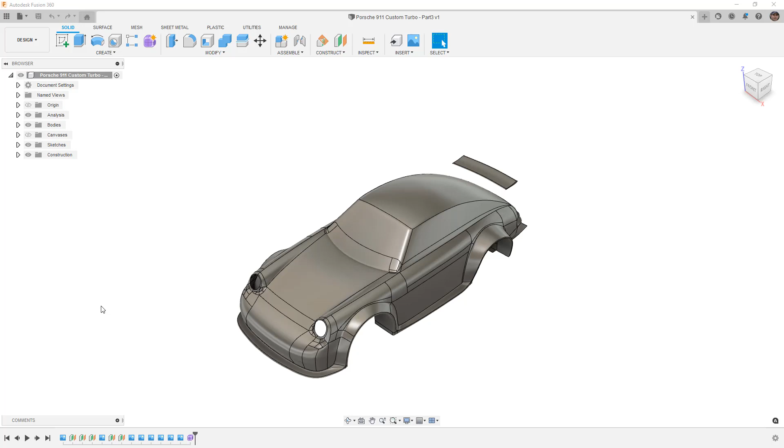Another thing in the description of the video is some rotiform rims that I modeled in a previous series. So in that series, we modeled these rims for a different size. So they've been modified so that they're now 20-inch, and there's a wider version for the rear. So you can go into the description of the video and you can use these rims if you wish, or you can bring in your own.

So the first step in this process is to go ahead and bring in the rims. And the reason I want to do it in this order is because that way, if we have to make any more tweaks to the body, adjust the wheel openings or anything like that, we can do it before we start adding those extra details. So the way that I'm going to do this, if you have them uploaded to your data panel, is simply just drag and drop them into your model.

When we do this, we need to position it. And this is the rear rim, so I'm going to pull it up about where I want it. I'm going to go ahead and zoom in. And you want to get it roughly centered in the wheel arch. And then I'm going to rotate around to a back view and simply pull it out where I want the wheel to be positioned. Now, in this case, I want the wheel to be just inside of the fender, so it has that look. That looks pretty good. I'm going to say OK.

I'm going to repeat the process with the front. Now, again, the front is a bit narrower. These rims are rather large. They are 20-inch, but they're also pretty wide. Now, the way that I want to do this is I'm going to bring this to the rear because I want these to be at the same height. I could have used some manual numbers to position these, but I want to make sure that they are at least visually at the same height. It's going to be important when we start to render.

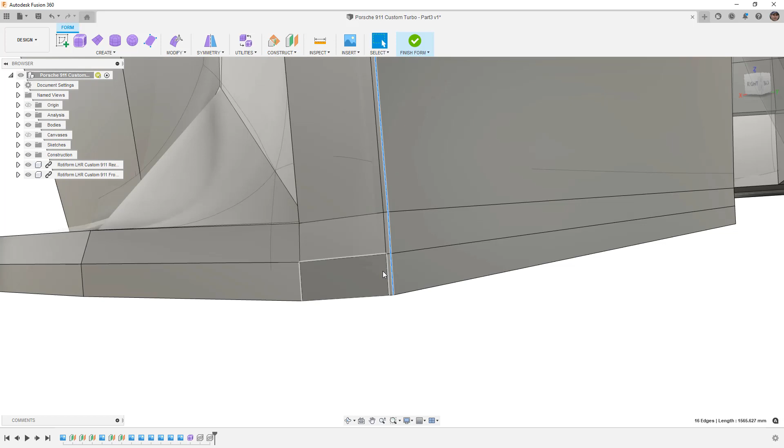And then we're going to hold down Shift, remembering that we have a T-point here. We're going to hold down Shift and double click. It'll grab that. We're going to repeat the process here. We're going to hold down Shift and select that, rotate around, hold down Shift and double click here. We should see the entire loop. We're going to do the same thing at the back because we do need to scale that down as well. We do have symmetry, so it is going to work on both sides at the same time.

And then we also need to bring in these other loops that are controlling the shape. And this is going to get a bit tricky because the loop, the double click isn't going to work. So we're going to have to manually select the first two, the third one, and then we're going to come over here, shift double click. I am holding down shift the entire time. You notice that we're missing a little piece here. We might need to go in and reconnect that. We can do that in a minute. And we also want to scale down this as well. So I'm going to shift click that still, and shift and double click here.

So the thing that we want to do is we want to scale all of this down. What I want to do is I'm going to go to modify and edit form. I'm going to reset my pivot and I want to stick it at the center of the wheel, but then I want to pull it down. Now the reason I want to pull it down is I want to get it roughly centered between the wheel arch and about at the bottom. It doesn't have to be perfect, but this is going to help us. We're going to say okay to the pivot location, and then we're going to begin scaling this down vertically. We want to get it to be roughly where the rim is.

We can switch between smooth and box display, but notice that that resets our pivot point. So if we switch, we need to reset the pivot point again. And now that we've scaled that down, we want to scale it smaller in this case, Y direction. So we're tightening it up on that wheel. So you can see that the wheel is kind of overlapping it. It's okay for what we're going to be doing in our renders. In reality, the fender well is not going to just go straight back. It's going to go up and then over. But for our purposes, it's going to be fine. So that's going to help us out.

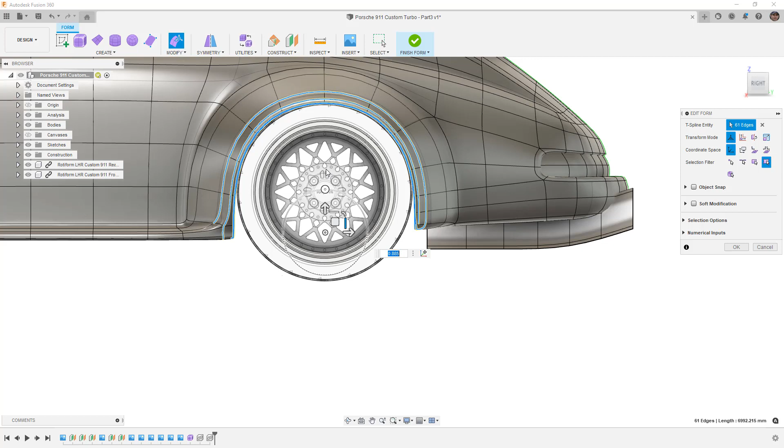We want it to be really tight in there, and that's the look we're going for to make sure our wheel is filling everything out. Once we have that, we can select Finish Form, and if we made all our selections, everything should work just fine. Now you can see the fenders are much tighter to the wheels.

That looks a bit better. Now, if you want to make any more adjustments, make sure you do it back here. If the wheels are in the way, we can get around that by hiding them in the design and then editing the form body. You might also want to hide the form body itself, so the main body here.

Once we edit form, it will show us the form body without that transparency. So if we go into bodies and hide, let's say, the tail lights and the wing and the Aero, you can see those are still there and transparent. But because we hid the body and the wheels, they're not visible there.

As we look here, there's a little edge we want to connect. So we're going to go to Insert Point, and I'm going to carry this over, hit Enter, just to help control that edge a little bit. You can kind of see that the resolution or shading happening on this edge isn't perfect.

Part of that is just the nature of how the model is being shaded. If you want to control that a bit better, you can add additional edges. It gets a little tricky, but you can go to Insert Edge and stick one relatively close, and then tighten that edge up a bit more.

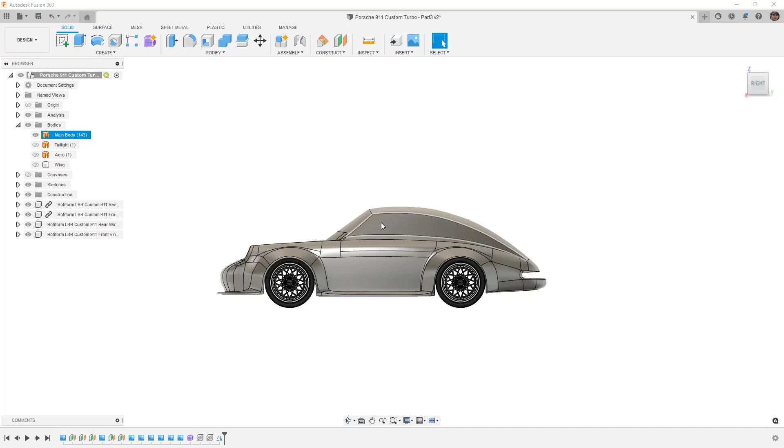The first way we want to do this is by simply creating a sketch wherever the windows are. So when we look at this, you can see there's a slight difference from the blueprint. The edge created on this surface is a little bit lower than the edge on the blueprint.

Now this is actually a drip rail on the car, and the window is just below that. So this is one of those cases where we're going to be a little more lenient with the shape, and we're not going to perfectly match the blueprint, because the shape of our car ended up having this edge that carries here and this edge that carries here. If we try to make the shape of the window different, it's not going to look right.

So the way I'm going to go about this is I'm going to create a sketch. It's going to be done on my right plane, which is the YZ plane. And I'm going to begin by using this midline of the body—this is already here, based on the shape we created.

So I'm going to use Create, Project Include, and Project, which is also P on the keyboard, to bring that directly into my sketch. This is going to be a part that we use, and I'm just going to make sure that I stay underneath this edge on the car. This front piece here is basically a straight line, and I'm going to use that to my advantage.

So I'm going to select that projected edge, and I'm just going to simply draw a line until about where the transition starts. I'm going to select the green check mark to OK that, and then I'm going to move on to creating a spline.

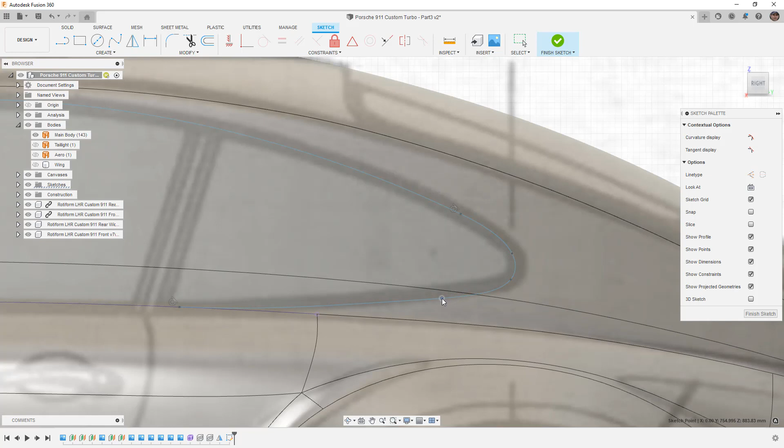But again, what we're going to do is get reasonably close to matching what the Porsche is, but it's not going to be critical that it's exact. I want it to be visually similar, but again, I'm not going to kill myself trying to get it exact because it will never be perfect, and I can tell you that.

The last thing that I want to do is take this projected edge. I'm going to find where the constraint is that is visible here, and I'm going to hit delete. Select it and hit delete. It's going to convert it to a polyline. You can see that it's got a bunch of vertices here.

And then we're going to use trim. And the reason I want to use trim is because I want to get rid of the section that is outside of it. It's going to tell us that some constraints are going to be deleted. That's fine, but I just want to get rid of those. So now what I have is this complete closed profile.

If we hide the main body, what we should see is a closed profile that we can select. We're going to be using this for a surface, so it doesn't necessarily have to be completely closed, but because we're going to be extruding a surface, if it's not closed, it will only cause trouble downstream. So if you cannot select this profile, spend a little more time making sure yours is right. Now that the body is hidden, I'm going to take this opportunity to make some slight adjustments.

And then I want to make sure that I don't have any extra geometry down here. So you can see that we've got a little bit extra here. I'm going to use trim, and notice that it's not actually allowing me to trim anything.

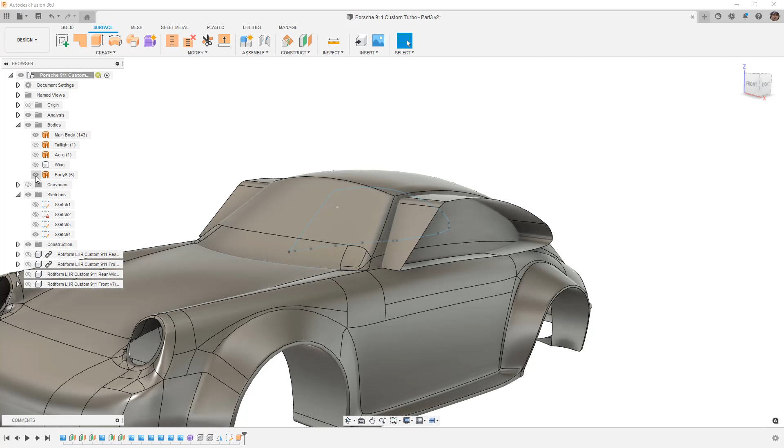So Control Z to undo, and let's bring this back. So the reason that we used this as opposed to just the sketch is because we're going to offset those windows inward. So we're going to go to Modify, Split Body. The body to split is going to be our main body. The splitting tool is our extruded surface.

You notice that we can extend the splitting tool if it didn't go all the way through the body, but in this case, we extruded it all the way out. We're going to say OK.

So now we've got the main body, which we can hide temporarily. We've got our extrude, and then we've got these window surfaces. So the reason that this is important is because now we can use these window surfaces to trim our extrude.

And then instead of offsetting them because it'll be normal to the curvature, we're simply going to move them inward. Because the windows never line up perfectly with the outside of the body, we need to move them inward to give the appearance that we've got that extra thickness that the glass is set into the door. And then we can add additional trim if we want to.

So what we're going to do from here is we're going to simply say trim. The trim tool is going to be this surface, and then we're simply going to get rid of everything on the outside of it. Using my right-click marking menu in the 12 o'clock position, I'm going to repeat trim. This is my trim tool, and I'm going to remove everything outside of it.

Now that we have those pieces of glass, what we want to do is use Move Copy. Now you can use M on the keyboard, or you can go down to Move Copy. We're going to move bodies. We're going to select the window body that we want to move. The coordinate system should be in line with the default origin, so you can see that X is in line with this direction.

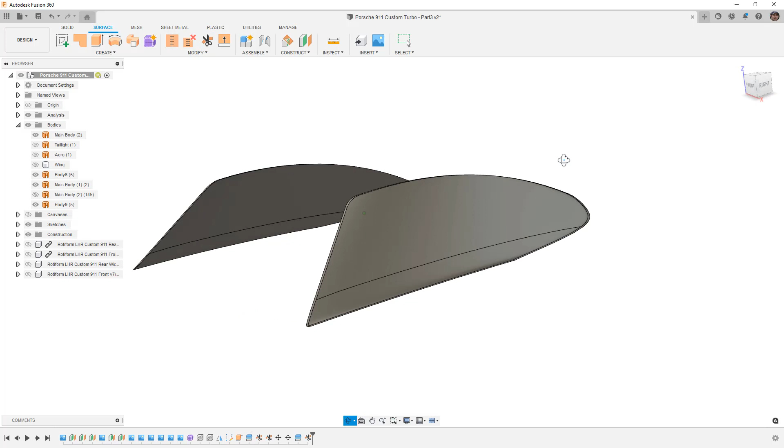So we can repeat the process using split body, or this time we could use trim. And that's simply because we can now trim it because we already broke off the other section. It gets a little tricky based on the selection because sometimes it doesn't seem to work, but you might just have to move around and select a different area. So that looks pretty good. This section down here doesn't look like it has tangency, but it's probably going to be good enough for what we need.

And the last thing that I want to do is I want to stitch these together. So I'm going to stitch the window glass and that little trim piece, and I'm going to repeat the process on the other side, the window glass and that little trim piece, and say OK.

Now, you might be thinking, why didn't we just stitch them to the main body? Well, the reason we didn't do that is because maybe you want to split it up later and leave the rear glass in place, or maybe you decide that you want to do some renders with the windows down. It can be helpful to have these be separate bodies, so that way we can just decide later if we want to put it all together. So I'm going to call this left-hand LH glass, and I'm going to call this right-hand glass, so that way I remember what they are.

So now if we look at this, if I hide edges, you can see that it looks like the glass is inset that 10 millimeters. It has a little bit of a step right here. Again, we could go back to the original sketch and we could make sure that that tangency is held true, and everything should update if we do that. So Control and 6 to bring my edges back, go back to sketch 4. I'm going to go ahead and edit sketch 4.

And you can see here that the tangency looks like it might have been lost. So what we can do is we can try to get that tangency back. We can finish the sketch. And theoretically, everything should still work fine. It should have updated that as long as our sketch and our extruded surface didn't cross over another face. So for example, as long as it didn't go down into this part of the door, the updates should all be fine. So that's the general process that I like to use to create the glass, and that's true for the rear glass and the windscreen.

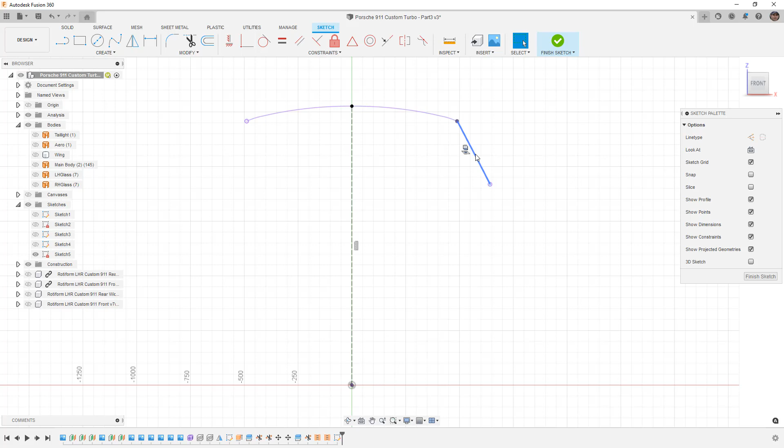So now is the time that we want to offset those inward. It might be helpful to see the canvas so we can kind of decide how far in we want to go. But again, we're doing this visually, so it's really going to be up to you. So I'm going to select offset. I'm going to grab this and simply pull it down. And it looks like about 25 millimeters is going to give me about the right shape.

For the bottom section of the windscreen, I'm going to use my line tool. I'm going to pick about where that is, and I'm going to draw a horizontal line out to the left. I want to convert that to construction, and I'm going to use that to help define tangency. And it's important that we have this reference here. You can see it's perpendicular to our vertical line. And that means when we mirror something across to the other side, it's going to be perfectly smooth at that mirror line. So that's going to be very important.

We're going to go to Create, 3-point arc. I'm going to start here. I'm going to come over to about where the curvature would change and make sure that we have tangency there. Hit Escape to get off the arc tool. This is essentially a straight line. So what I'm going to do is use my line tool, and I want to carry this down. And we're going to maintain tangency.

And then I want to bring this arc over, and I want to connect these 2 points. So again, what we're doing here is we're snapping these together. This arc has tangency at the center line where we're going to mirror. And now I want to create a fillet there. I want to round that corner. And we can decide how big or how small that needs to be. 15 millimeters looks like it's going to be okay. And then we'll hit Enter to OK the fillet.

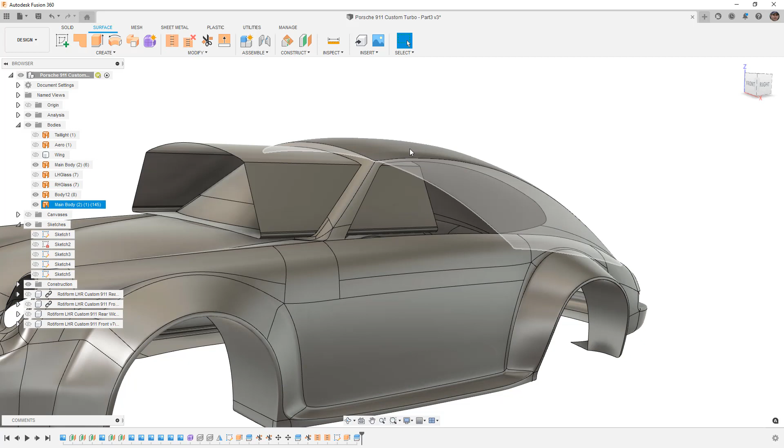So now we can use this again the same way as a split body tool. Bodies to split is the main body. Our splitting tool is this surface. We don't need to extend it out. If we do that, it's going to extend it all the way through the back, and we don't want that. So we're going to use just the extruded surface, and we're going to say OK. Now we can trim. Using the split body, we can get rid of this front section of the windscreen.

And then we can use Move Copy. Again, that's M on the keyboard. We can move the new body that was cut, the glass. So we need to find that. It's going to be this original main body. And we need to select a distance to move it back. So 50 is probably a bit too much. Let's try 25. And you want to look at this from the side. You want to see what appears to be realistic. Now, when we move it back 25, that seems to be a bit too much as well. I'm just going to go 10 millimeters, the same as we did for the side. And I'm going to say OK.

Now, theoretically, if we hide this, we should have an extrude. Might be kind of hard to see. This extrude that connects to our A-pillars. So now what we want to do is take that offset, and we want to trim this extrude. So let's hide the main body. And you can see here now we've got that small section. We can trim or split body. Either are going to be fine, but the trim tool is going to be this, and then we want to get rid of everything behind it. So once again, what we've done is we've created this little offset that's going to help us seal off the windscreen. You can see here everything's sealed off.

Now that we have surfaces, we can come back and we can add fillets in the corners if we want them. But what I'm going to do first is I'm going to stitch everything together. So this is a case where I'm never going to do a render without the glass. So I'm just going to connect it to the main body. And assuming we have green edges, then everything looks good. Those will all be connected. And now if we want to, we can come back with a modify fillet and we can round off these inner corners. We could have, of course, done this with the sketch itself. Sometimes it's easier to do it afterwards with the surface. And we can pull that in and just round it off a little bit. 10 millimeters will be fine.

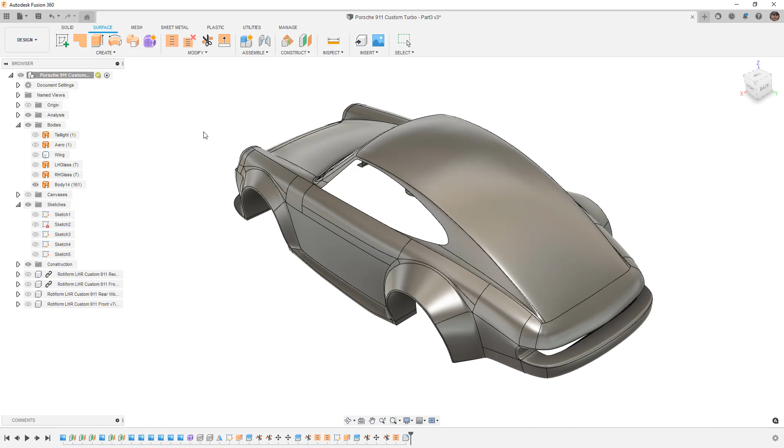For the back glass, I'm going to do this from the top. I'm going to bring back my canvases. You can see this blueprint actually has a sunroof on it. We're not going to do the sunroof. We're going to leave the complete top as is, but we want to create this back glass. So I'm going to create a sketch on my top plane. I'm going to rotate it around so that it's horizontal.

It's a bit easier for me to work with this way. And I want to begin by creating some lines. So I'm going to start with a line from the origin. It doesn't have to be from the origin. You could simply create a line out here that was coincident with the origin, but for me, sometimes it's easier just to draw all these lines as references. I'm going to make sure that they're construction. So again, X on the keyboard, or you can do it over here in the sketch palette.

Then I'm going to create, again, some reference lines that'll help give me that perpendicular, or in this case, vertical relationship. Those will be construction as well. So again, X on the keyboard. And then what I'm going to do is I'm going to create some arcs. Now, I know that this isn't just a straight line, so I'm going to create some arcs, and I want to make sure those arcs are tangent with this perpendicular line. And the reason that I need those to be tangent is I want to make sure that when I mirror these, that the mirror is smooth across the middle. So make sure that you do have those tangencies.

And then we're going to bring this all the way to the corner. We could offset this edge. It looks fairly straight. So what I'm going to do is I'm going to draw a straight line and just make sure that it looks parallel. Again, visual references or visual cues are going to be more important for us than to perfectly match the blueprint. So we're going to take that, we're going to add some fillets in the corners, make them whatever size appears to be right. 37.5 looks okay to me. So I'm going to hit enter to okay the fillet.

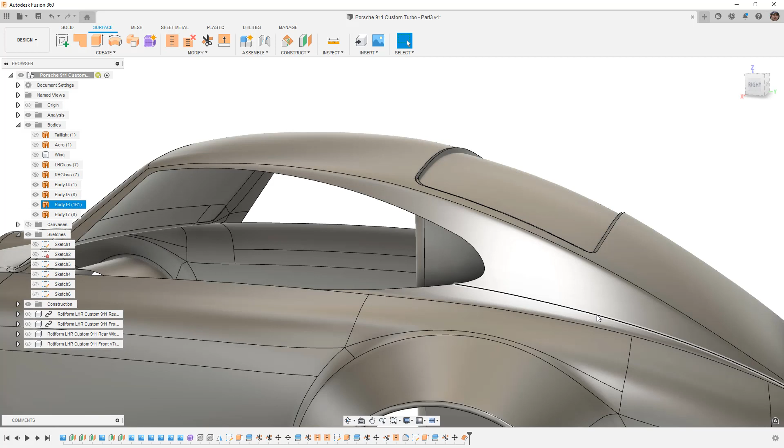Another thing that we could do, if you don't want to just have that hard vertical edge, we could get a little bit more creative. So for example, we could go to offset. We could select this body and we could offset it inward. Let's say -5 millimeters. Let's go a little bit more extreme so we can tell. Let's say -10 millimeters. With -10 millimeters, what I'm going to do is I'm going to hide the main body so we can see what we did. What we're going to do now is we're going to use this offset to trim away the moved glass, and then we're going to loft between the main body and this.

So we're going to go to trim. My trim tool is going to be that new offset, and what I want to get rid of is that little sliver, that little piece there. So now I've got this extrude that we don't need. I've got my main body. Let's go ahead and hide this extrude as well.

So now we've got a gap between our main body, but the reason that we did this is because when we look at it from the top, now the glass and the opening are perfect offsets of each other. And the reason that we could do something like this is now we could loft between them. Now, when we do a loft between them, I'm going to use chain selection, and I'm going to go from the entire upper chain to the entire bottom chain, and I'm going to go ahead and stitch those together.

So again, the reason why we would do something like this is if we didn't want the glass to be offset completely vertical, if we wanted to maintain a small angle there. We could always come back and do something like a fillet on this corner. We could do something very small, like 5 millimeters. It would probably work. It's not necessary. Again, it really just depends on the car and the geometry you're working with. But sometimes using things like a loft can help us get those transitions to look a little bit more realistic. Let's do a quick save.

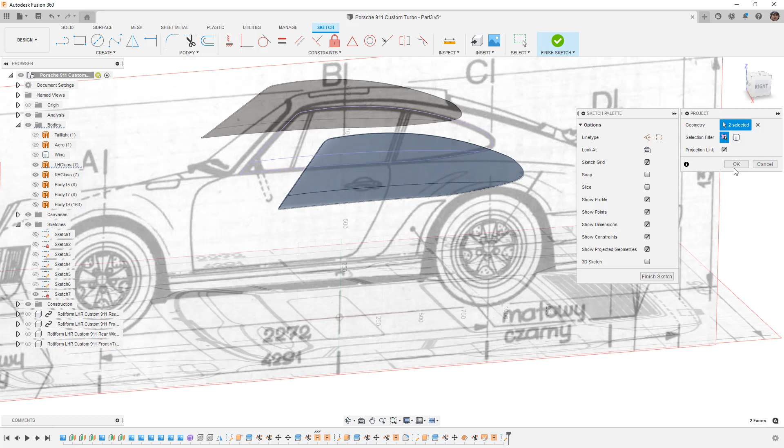So let's go ahead and use P on the keyboard to project, and we're going to bring in either this sketch, or we can simply select an entire face or a body that we want. So if we select these two bodies, you can see that it brings in some of the midlines, or you can select the sketch. It really doesn't matter. I'm going to go ahead and delete those middle pieces, just select them and delete them. But now I've got the upper and the lower sections.

So I'm just going to use my line tool, and I'm going to simply draw a line that looks like it is roughly in line. And then I'm going to make a parallel line. I'm going to do the same thing back here and draw another one. I'm going to make them parallel. And again, this is just going to add a little bit more realism. It's not necessarily required or needed, but it does help us with the realism a little bit.

All of them are parallel. If we want to, we can use D on the keyboard and dimension them so that they are the same. I'm just going to select this dimension to link them together. And again, we can do the same thing up here just to make sure that they all look consistent.

So now that we have these three pieces, what we need to do is, well, first off, let's get rid of the canvas. It makes it really hard to see. But we're going to extrude them as solids. They could be surfaces if you wanted them to. Honestly, it just depends on what you're doing.

If you want to make them surfaces, what you're going to end up doing is splitting this and then offsetting them forward and stitching them together. But it's probably just quicker and easier to do them as solids.

So I'm going to start with extrude, and I'm going to select all three of these. I'm going to start them from an object. So when I go from an object, I'm going to select the left-hand glass, but notice that nothing's happening because it wants an individual face to start at. So when we do this option, it's not going to give us the best result because we can't select the entire thing. So a way that we can get around this is by actually going to offset this.

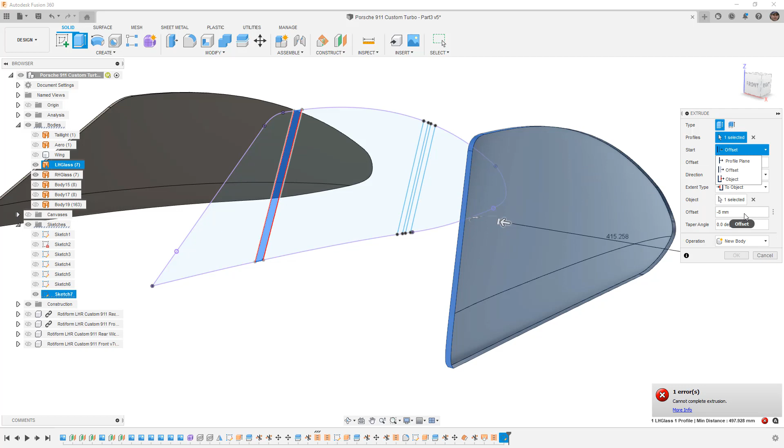So we're going to simplify this a little bit. We're going to do just a single edge. We're going to go from an offset, and we're going to go to an object. Now, if we do 0 millimeter offset and to an object, you can see that it's still not working.

So let's try this. Let's go from the profile plane. Let's go to an object, and let's go 10 millimeters. Now, when we add the 10 millimeters and we're going up to this object, it's not working for two reasons. Well, for one main reason. It's not working because of this right here. Because this is stitched to the rest of it, it just absolutely does not like it.

So the way that we have to get around that is by selecting an individual face, but then you can see that it's missing the stuff down here because it doesn't actually know what's supposed to happen there. So the easiest way for me to make this work is to create an offset. So I'm going to offset this 10 millimeters. So we're going to go -10.

And then you'll notice that it doesn't actually extend in the proper place at the bottom. And the reason it doesn't is because we didn't offset it before, we just moved it. So we can extend the entire thing out and just move it out an additional 5 or 10 millimeters. It really doesn't matter as long as it extends past where you need it to cut.

The other option that we could do is to create an offset like we did of this, but make it 0 millimeters. And the reason we make it 0 millimeters is now we can use modify, move copy, and we can move it forward the 10 millimeters that we need to go. So this gives us the complete outside section.

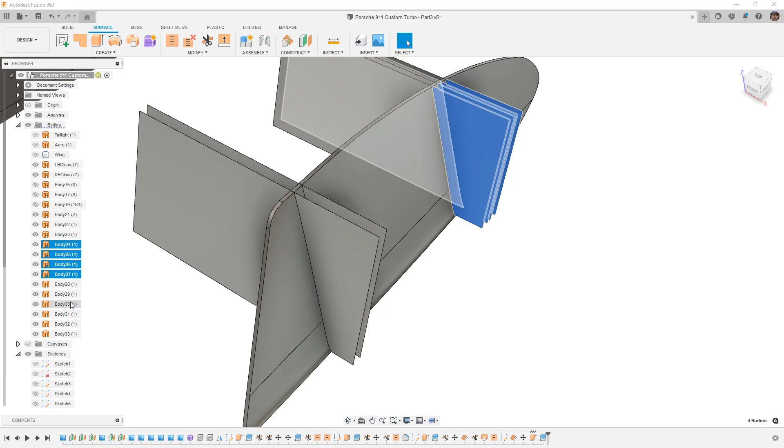This is going to give us all of these little pieces, these little surfaces that we don't need. So we're going to find where they are and select them. You might need to move the cursor down until you find which ones are the correct ones. It looks like these two here.

I'll also go back to these other extrudes that we don't need anymore. I'm going to right click and select remove. Remove is important and not delete. The reason remove is important is because it puts something in the timeline for us, where delete will try to get rid of everything associated with it, and that's not exactly what we want.

Now that we have the outside section of where these trims are, we can use them to break up the rest of this. This is where a tool like a mutual trim would come in really handy, but unfortunately Fusion doesn't have that, so we can't necessarily use trim in all cases.

So I'm going to start with trim. My trim tool is going to be this surface, and then I'm going to remove the outside section here. I'll repeat that: a trim tool is this back surface, and then I can get rid of this outside. Now that works on the outside pieces, but it doesn't work on the inside pieces, simply because we need to leave the rest of the surface for other things.

So we're going to have to use split body. We could also use split face and then delete them, but split body seems to work. Bodies to split and splitting tools - here I'm going to select multiples, all the ones that we need, and say OK. You can see it gives me an error - it was able to try to split this, but you can see that it didn't actually work.

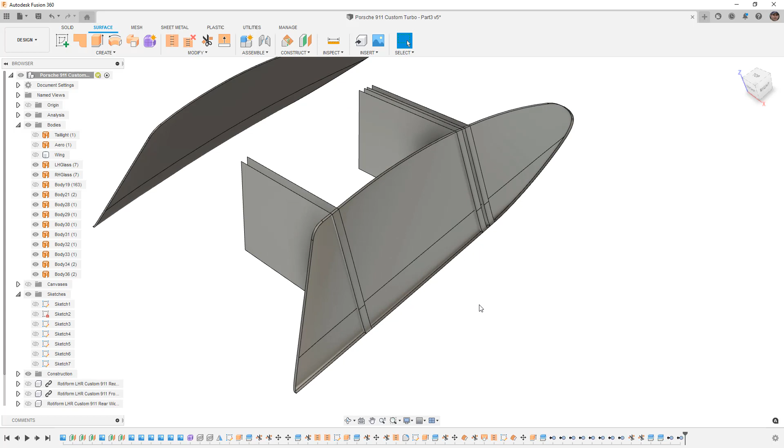The next thing we're going to do is go to trim. The trim tool is going to be this right here, and what we're going to remove is all of these back sections that we don't need. This one's pretty easy - we can select all these little pieces, say OK, and it should get rid of all the back pieces of the surfaces.

At this stage, we have to decide do we want this to be a part of our glass, or are we going to just make these their own bodies? Now if we're going to make them their own bodies, it's going to involve us splitting this back glass, making copies, and stitching them together. We can leave them as just surfaces and just apply appearances to them.

Any of those options will be fine. For me, what I'm going to do is I'm going to stitch the little pieces together. I'm going to rotate this around, stitch those together, and repeat the process and do the same thing over here.

If you ever need to select through something, you can hold down the left mouse button. So for example, over here, let's go ahead and hold down the left mouse button, and it can show you which little pieces are available for your selection.

So now that I have those pieces, because I need to repeat this on the other side, I'm going to leave them as is and mirror them. I'm going to make sure that I mirror them as bodies. It's going to be these three pieces, and the mirror plane will be right in the middle, and it'll simply put them on the other side.

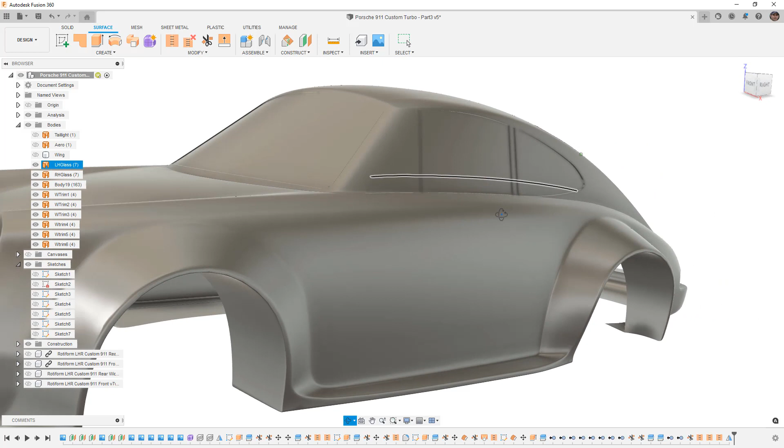At this point, things are looking pretty good. We're getting a lot of those little details, but hopefully it's not getting too much. Hopefully you're starting to realize that it does take a good bit of time, and sometimes the method you try to use is not going to work, like extruding the solids up to this window didn't work. Sometimes it does, sometimes it doesn't.

It's going to depend partially on whether or not your sketch completely sits inside that surface, if you're trying to use multiple profiles, and all these different little things that can cause those problems.

There are plenty of other bits we need to do to this. This is a good time for us to save and think about the next steps. For me, what I want to think about is do I want this body kit to be smooth and blended into the rest of the car, or do I want it to look like it was stuck on? And how do I want the rest of the body to look, the openings in the bumper, and all those extra pieces?

We also need to think about things like the headlight. We have a scoop that we need to make on the hood, and we need to have the opening for the engine bay, and we have a spoiler, and we've got the tail lights and the aero. We've got all these little bits that need to happen, so there are a lot of extra steps that we need to do for the rest of the car.

But the first thing I want to start to think about is the body kit. I'm not going to worry about the openings in the front end just yet. I need to think about where they actually split. So if we take a look at the original car and the blueprints, you can see that the bumper splits right here. The original body is just below the headlight, and it comes to about here.

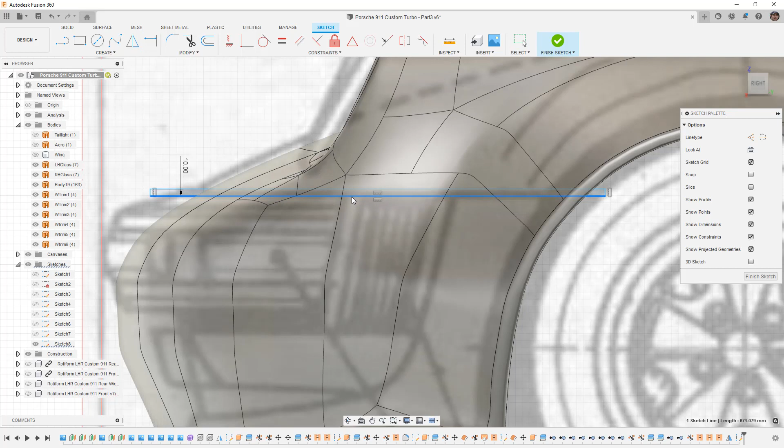So I'm going to go to a sketch. Again, we're going to just use these default planes, and this is actually going to be pretty straightforward. I'm just going to create a rectangle, and the rectangle is going to represent the height of the seam that we're going to create. So I want to figure out how wide this needs to be. While I don't need to dimension it, I'm going to, because I'm going to try to keep the gaps fairly consistent. I'm going to say 10 millimeters. 10 millimeters is going to be the default seam that I'm going to use. So I want to find about where that needs to be. That looks okay, and we're going to finish the sketch.

Now this gets a little tricky. The reason is because when we split this up, it's not going to work like the headlight. It's not going to work like the windscreen or the side glass or the rear glass, because we can't just use this extrusion to fix the rest of it, right? Because if we create an offset, it's going to be normal to the curvature, so that's not going to work.

Also, we need to think about things like this tiny little face right here that's going to be right underneath where that sketch is. Sometimes those little things can be very problematic. Back here, we're very close to this point, so if this edge was a little bit higher, we'd leave a tiny little triangle there. These are all things we should be mindful of because they're going to affect our selection. What I'm going to do is go to Modify, Split Body. Body to split is the main. The tool is this rectangle, and it's extended. So if we rotate this around, it's extending it all the way out. And what we've done here, if we hide the canvases, is we split the body up.

Now, the first way that you can fake body seams would be to simply change the color of this. If your renders are far away, that usually is enough. You can either make it a little bit darker color of the body, or you can make it black, and sometimes that's enough to give you that effect. If we just hide this, you can see that we can't just leave it open, because obviously that is going to show everything inside. So one option is to try to scale this down a little bit. It's not the best option, but sometimes it can work. Another option is to create a sweep. I think in this case that's going to be the best option because of the orientation.

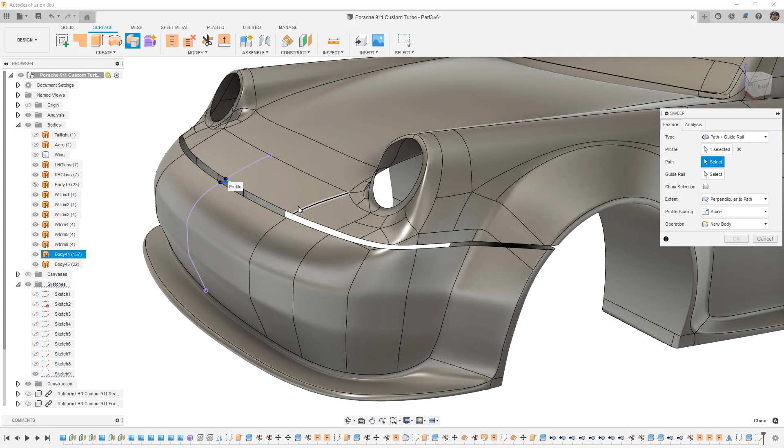For my first path, it's going to be this upper section. But notice that when we use chain selection, it's trying to go all the way around the car. So we want to turn off chain selection and manually figure out where we need this to go. Again, be mindful of those little pieces, any small selections, and then we can carry that all the way back. The second guide rail is going to be here. Again, be mindful of those small selections. If it doesn't let you select it, it probably means there's a very small sliver there and you need to work your way around. I don't know why these selection dialogues are always in the way, but now what we have is a sweep that represents half of that seam.

So we're going to go to Create, Mirror. We're going to mirror that body and then mirror it across our middle plane. We're going to select Join, which should join it together with the other side. So now we have that trim.

And what I like to do is I like to keep things like the bumper and the body separate, but I do want to add the trim to one of them. It makes it a little bit easier for me. So if you decide that you want the trim to be a different color, for example, you were going to make it gray or black, then you would want to make sure that you keep it separate. It'd be easier that way. But for simplicity's sake, I'm going to stitch the bumper and that trim together.

So that way, if I decide to, say, hide the bumper, then I have the car and it doesn't look realistic because the trim isn't there. But if we isolate the bumper, then you can see that I can work on just the bumper alone. I can hide everything else. And it just kind of helps break up the body.

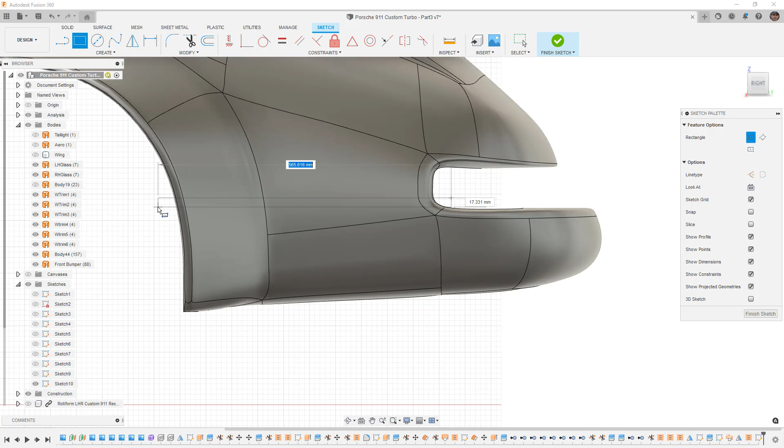All right, in the back, again, my taillight is really low, but I'm going to follow the same procedure. I'm going to sketch on the side. I'm just going to use a rectangle. I'm not going to be using the blueprint this time because, again, our bumper is a little bit different. But I just want to break it up. And again, we're looking visually at consistency.

So I'm going to make it 10 millimeters. And I want to pull it down so that it breaks up the body about in this corner. We could go back to the form and we could spend more time to tighten up this corner. Again, it's not really worth it. So we're going to use Modify, Split Body, bodies to split, splitting tool.

Now this one works out a little bit different. We could use sweep if we wanted to. We could just offset this, or we could scale it down a little bit. So these are all valid options. So I think what I'm going to do is try to scale it down. We've got one on the left side and one on the right side. I'm going to remove the one on the right side simply because we're going to make some adjustments to one of them and I don't want to have to do it twice.

So next I'm going to try to use Modify and Scale. The entity that I want to scale is that little piece there, and then I need to figure out if I'm going to scale it down uniform or what we're going to do. So I'm just going to try to hit 0.99 and scale it down and say OK. And you can see that it gives me the appearance of that little seam there.

Now, when we do this, we need to still connect it back to the car body. And you'll notice that when we scaled it down, it didn't really move anywhere. So we want to use Modify, Move/Copy. We're going to select that and we're just going to move it in minus, let's say 2 millimeters, to give a very minor seam there. And then we need to connect them together. So we're going to do this with loft.

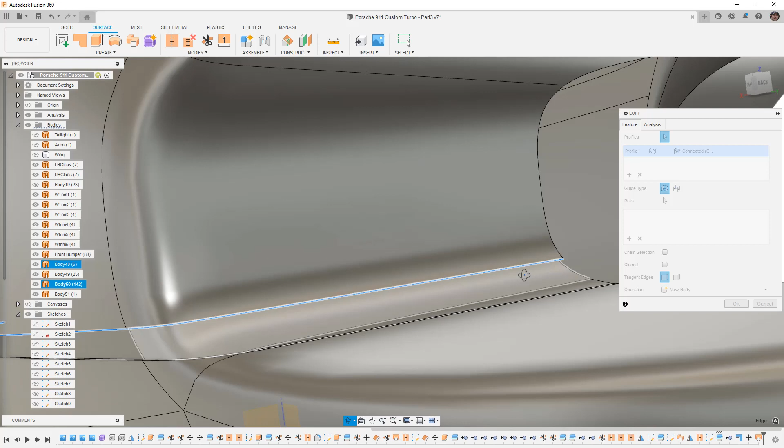And the reason we need to do this is because if we ever have a render at an angle, you would be able to see inside of that gap, and that's not what we want. It really ruins the realism. So again, we're just going to kind of work our way around. Select this and that. Also, if you make a selection that is not connected to that original edge, it'll automatically make another profile for you.

But you can see that it's starting to create a preview, and sometimes that becomes problematic because it can give you warnings that it's trying to connect the two and there's a gap or something like that. So sometimes it's just easier to hit the plus and make a new profile because then the preview isn't really a problem.

All right, so now that we have that, I want to hide the main body and I want to stitch all these together. And so that main scaled offset, a tiny little sliver, which we might need to rotate this to see. That piece there, and then rotate it around and find the other piece. And I'm not going to connect it to the bumper just yet because I need to mirror it to the other side. So anything that we do, we're going to be mirroring. So again, just make sure that you're mindful of that, and then we can stitch them together.

So the main bumper, and then this piece here and that piece there. And now those are both connected to the rear bumper. So now we can find the rear bumper, we can rename it. And then we've got the main body, the rear bumper, and the front bumper. And again, now we've got that realism. We've got that little bit of a gap, and it looks like a seam. When we get into doing renders, it'll look a bit better, but you can see based on just this angle, we've got that seam, that 10 millimeter gap that we created.

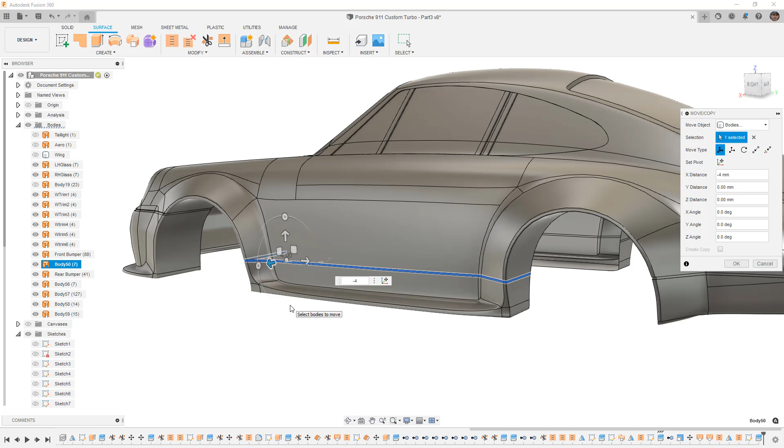Now, this one is going to actually work out a bit better for us because instead of doing all the work of lofting and stitching everything together, I'm going to take a shortcut and just use move. We're going to move that small sliver on the left side, which is going to be this one here. And I'm just going to move it in -4 millimeters. Now let's go a little bit more. Let's go -5 millimeters. And now you can see that it looks like it was offset inward.

The one that's on the other side, once again, I'm going to remove because I'm only going to do the work once. And actually, we could remove the entire side skirt from the other side. That way we can stitch everything to this bottom one and just mirror it to the other side. Another nice feature is that when you're working on these pieces individually, it gives you a lot of flexibility if you want to, say, create a couple different side skirts and try out different looks. If you have them as separate bodies, you can just make some modifications to one and see how it looks.

So once again, if you just start to select a different edge that's not connected, it'll automatically make a new profile for you. But sometimes the preview can be problematic. So let's go ahead and find where that edge ends. Should be right there. And you'll note that the inside is extended in because we did that move. But again, that's okay. You're not going to see anything in there. Then we're going to just do another loft. We're going to go from this one here, again, working our way all the way around.

I'm going to select that there, and this one should wrap all the way around. And again, if we do plus to create another profile, it's going to be a little bit easier for us because now we don't have to worry so much about some of those errors that pop up. You do still see a preview here, but I find that if you hit plus to create another profile, sometimes it's just a bit easier on the calculations.

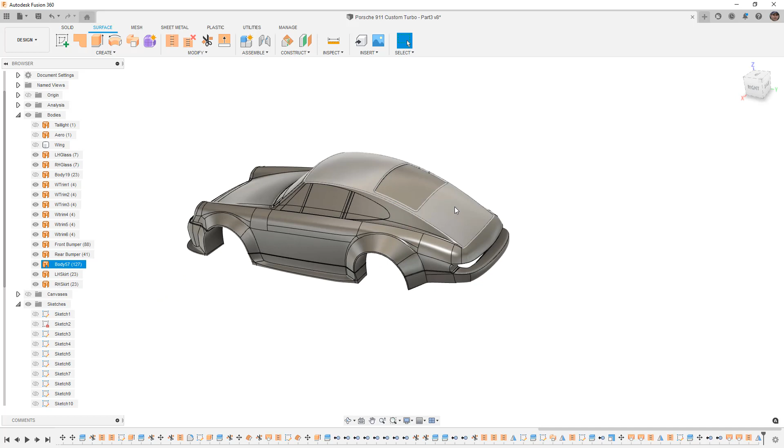So if we bring the main body back, you can see now it's starting to look a little bit more real. We've got these seams here, the seams on the side. We haven't done the door yet, but we've got the one on the back. We haven't taken care of the engine. There's some louvers there, so that's going to take a little bit of work. We haven't touched the wing yet, and we haven't done the hood. We haven't done the openings on the bumper, so there's still a lot of little bits that have to happen. But we're making progress, and the process is going to be very similar from here on out. But let's go ahead and save this before we move on to the next piece.

Since we are looking at the side here, let's go ahead and just take care of the door. Now, the door is going to be probably one of the trickier sections. So what we want to do is we're going to start another sketch on the side. And because I already know that the window sort of lines up here, I'm going to use P on the keyboard to project. And I want to just take this vertex right here. Actually, you know what? I'm going to take this entire edge right there. And then I want to find the bottom of the A-pillar right here.

So in reality, the A-pillar itself is going to open with the door. So this section here, the glass and everything would open with the door. We're not going to get down to that level of detail. So really all we're looking to do is break up the door so that it looks more real. So I'm going to just bring in some of those references where those seams are going to hit. Once I have those references, I'm also going to take this reference here. But remember, this is a horizontal line.

So all I really need to do is make sure that either I offset it or I take a horizontal line. So for me, since we know it's horizontal, I'm just going to start here. I'm going to draw a horizontal line until that arc starts. And then we can carry this with an arc. And we do that by going back to the last vertex and just holding down the left mouse button. So that allows us to turn the line into an arc. So this is the starting point for the door.

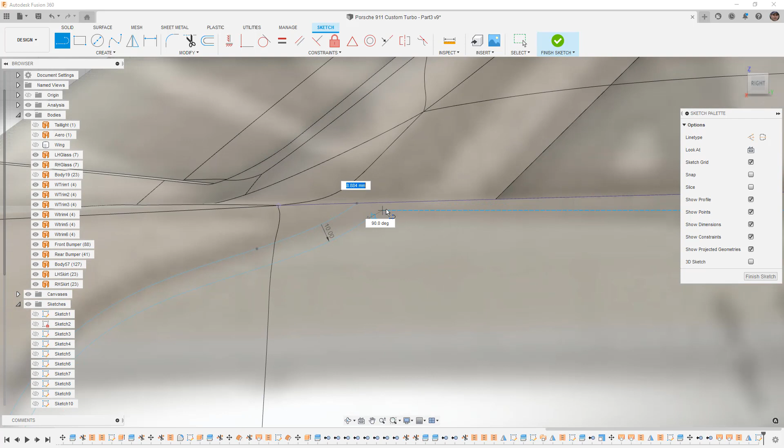And I'm going to go to the front here. I'm going to take a straight line and I'm just going to carry it up, making sure that I have tangency. So what we should see is that intersection here is a complete closed profile. So if we hide the main body and we try to select it, you should see that it's an entirely closed profile. So this will make sure that we're attaching to a body line that we already have on the car and that we have a closed profile that we can use to split it up.

So let's finish the sketch and let's figure out how we want to split the body up. So the way that I want to do this is by going to modify and split body. It seems to be my go-to tool. But when we do the body to split, we're going to select the entire body, not the side skirt, not the window. And then the splitting tool is going to be the sketch, but we need to select the profile. So we need to make sure that we do have a closed profile.

And it's not going to work because of our projected references. So we're actually going to end up doing this twice. So you can see that it extends up and it's going to try to break the upper section of the car. So if we just say okay, it's going to break that upper section. So we need to turn off extend split tool and say okay, and notice it doesn't work. Now, the reason it doesn't work is because we don't have that closed profile.

So in order to get the closed profile, let's go fix our sketch. We're going to go back into that last sketch, right click and edit. And what we want to do is we want to try to trim this. Now, unfortunately, trimming is not going to work on a projected edge. So we need to select it, find the projected constraint, and hit delete on the keyboard. Then we can come back and use trim to get rid of these extra little sections.

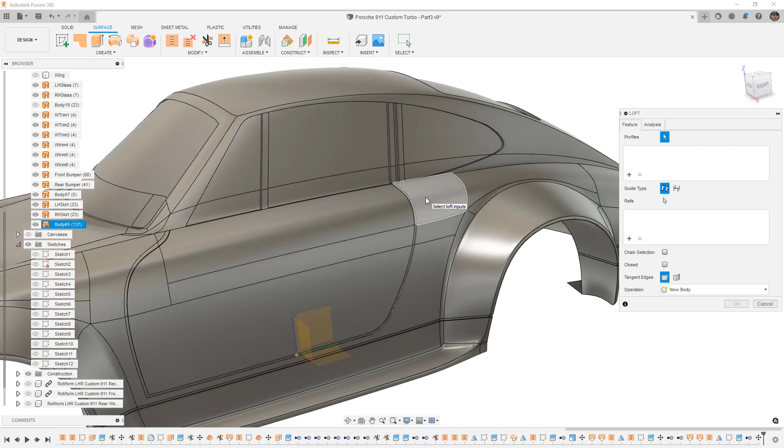So the lofting part is actually going to take a good bit of time because of the selections. If we try to go to loft and we use chain selection, you can see that it's going all the way around the window, and that's not what we want. We don't want that entire opening. So we're gonna have to do it manually, and it's probably easier for us to hide some of the pieces. So we need to find which pieces we can hide.

So let's hit escape to get off the loft tool. We've got the main body, but notice that the door is still connected to the main body. Now, if we want to disconnect the door, what we need to do is we need to unstitch it.

Now, the way that we do that is we use unstitch, and we need to turn off chain selection, and figure out the pieces that we want to unstitch. If I select those pieces on both sides and say OK, theoretically those pieces should be unstitched from the rest of the car. But you'll notice that the rest of the door pieces aren't. So if we do unstitch and select all the other door pieces on both sides, then those door pieces should be fine.

Let's go ahead and hide the glass. Let's hide the front and rear bumpers. Let's hide the side skirts. We don't really need to see them right now. And we can hide all the window trim as well, since these are not going to be important to us.

But what we do want is those little offset pieces, right? So those little pieces that we created, that we moved in, we need to connect the door to that. So we're going to do this with a loft.

Again, chain selection is going to try to go all the way around, and you'll notice that these are all individual faces now. So once you unstitch something, it's going to take those faces you selected and break them up into individual faces. So let's go ahead and stitch those back together.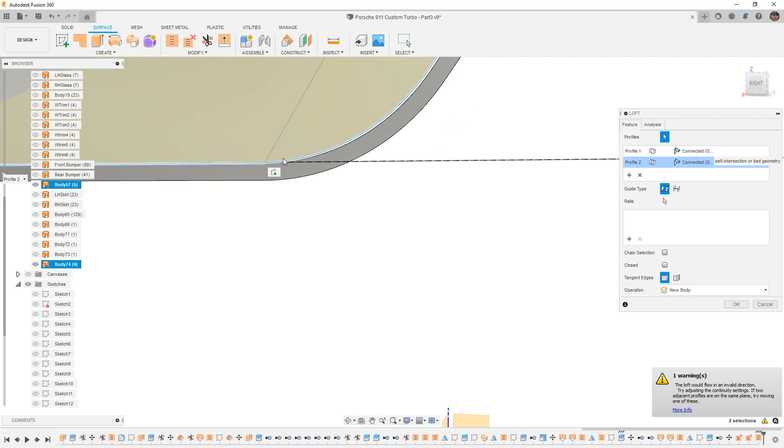Now you need to work your way around, again just making those selections. This should be a single edge here. We can rotate it around. And this edge here, all the way up.

And we'll have to do this with the body as well. We'll come all the way up to here. And there might be a little tiny edge here, so make sure that we do grab that as well.

And now you can see that we've got those pieces. I'm going to go ahead and stitch these three together right now. It does add an extra feature in the timeline, but it does simplify the number of things that we have to select. I'm going to bring back the main body, and we need to repeat that process to fill in the rest of this gap.

And again, it won't be realistic if we try to create a render and you can see the ground through the door seam. So we're going to have to work our way around selecting each of these.

And this does also help us. Let's go ahead and deselect that. This does help us because in some cases you might find that you can't loft the entire thing. You might find that you want to manually select certain entities.

I'm going to rotate the car so we're looking at it from the inside, and for the second edge I'm going to work my way around the inside. Sometimes this will be a little bit easier since we haven't created a floor or bottom to the car. Just going to work my way forward, find this edge, and we need to go all the way up.

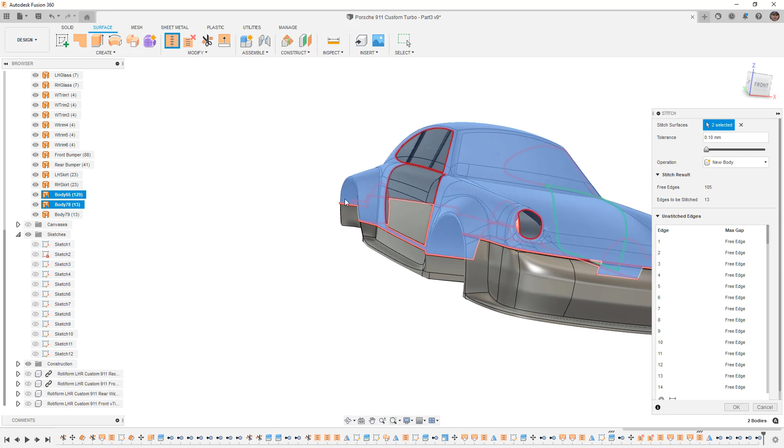That'll simplify the process of applying appearances and things like that. For me, there are a couple extra little pieces, so this piece right here I'm going to remove, just to clean up the stuff. We've got the side skirts, this body, and all the other door pieces, so I'm going to remove those. I'm going to stitch the door, the main body, and this door together. I don't really want to worry about opening them up or anything like that.

For the glass, I'm going to go ahead and leave it for now, but probably not worry about doing anything special with it. Some of the things that will take your renders to the next level are details like windshield wipers, but those take a good bit of time and you need a good reference. For this example, I am going to do the engine cover opening, and we will do some side view mirrors. I'm not going to do windshield wipers on this, but just note that you can.

Okay, so a couple more things we have to do. We have to have the scoop on the hood, and we also have to deal with splitting the hood up. Because the stock car has this sort of intake that goes up to the hood seam, what I'm going to do is draw the gap for the hood first, and then do this, so that way I've got a reference line. I'm going to go ahead and split the hood up, but let's do a quick save.

Then we're going to draw a sketch on the top. Again, I like to work with the car sideways, it seems to fit the screen a little bit better. I'm going to hit L on the keyboard for line, start from the origin, and just draw a line to where I want that reference. I'll draw this all the way down to about here, hit escape to get off the line tool, and then hit P to project this reference, and connect that line to it.

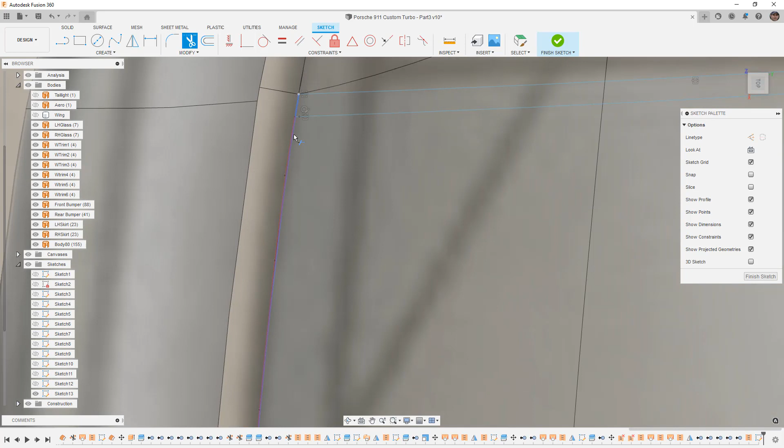Once you find that constraint, hit delete, and then we're going to use the trim tool. Now we will get an error here just because it's breaking some of the constraints. That's fine, but we want to trim everything. So what we're left with is this little section here.

Again, the test for this is hide the body and see if you can select the inside. What we want to see is that we've got the seam for the hood. The reason this is important is if we just let it extend as a trim surface, it's going to try to also trim the side skirts, and we don't want that.

So let's hide the canvases, finish our sketch, bring back the main body, and do our split body. Bodies to split is going to be just the car body, and the split tool is here. But notice what's happening - it's automatically trying to go to here. That is not what I want.

So what we're going to have to do is go back into that sketch one more time. And that original line that I placed up here, make sure that it's construction. Anything that we don't want to be used, make sure it's construction. All right, let's try that one more time.

Modify, split body, bodies to split, and our split tool. What we want to do is try to add all 4 sections. And what we should see if we look at this from the top is all those sections selected, and okay.

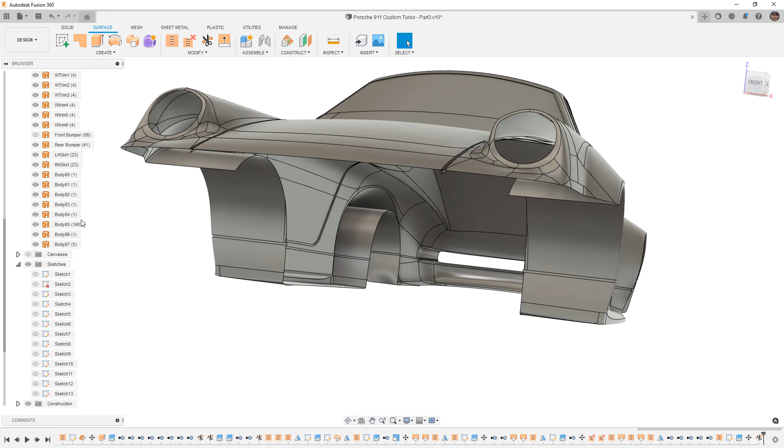What we want to do is find those little sliver pieces and get rid of them because we really don't need them. So I'm going to hide the rear bumper, the side skirts, all the window trim, and the glass. You can select multiple things, right click and show/hide to hide them all at once. And then also this big piece here.

That is going to be what we need to keep. And then the rest of this stuff here, we're going to select it - notice that it grabs all of them here. We're going to right click and remove them. Now notice it's not allowing us to remove them.

It just has delete, so I need to select them manually. I'm going to shift select those, control select that, and remove them. So now we're going to bring back this and the main body, and start to connect these pieces together. There is one little sliver piece that's left here.

If that happens, you can actually select the face and hit delete on the keyboard to delete a face. It doesn't work if you select an edge - it only works if you select a face. So if it's a tiny, tiny sliver face, it might be kind of tricky, but you might need to zoom in.

See if you can select it as a face and delete it. And if not, we might just need to leave it there. So we could also extend our original sketch out further past this so that it does cut it properly. For me, I'm not too concerned with it. It's going to be fine because there is actually a seam for the front bumper that ends up right there. So it's not going to really be a big problem.

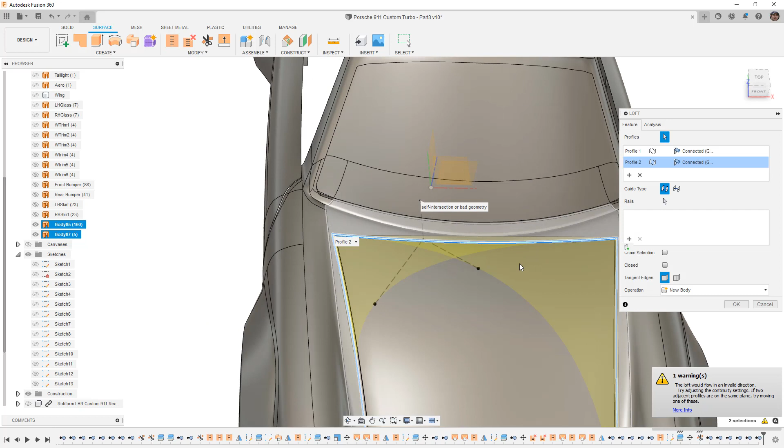I know this is probably making some people motion sick. When you're working on stuff like this, you are going to have to zoom in and zoom out a bit. I don't tend to use a 3D mouse. I used to use them quite often, but it doesn't really work very well in videos. I think it tends to make people a little bit more sick. So I tend to just use the mouse wheel to do it now. But I do apologize for zooming in and zooming out so much. It is hard when you're doing something like this.

Let's go ahead and clear these out. I messed up the selection, but work our way around the hood. And that should go all the way to the front. And then we're going to do the same thing underneath here. So we're going to work our way around and select that back edge. Do the same thing over here.

So Fusion 360 does a pretty good job of edge selection, but I wish that it did have a little bit more flexibility in terms of the chaining and tangencies. I think that would go a long way in doing some of this work. All right, so now that we have all of those pieces, I'm not worried about the hood itself being able to open. If you do want to make your hood open, then you probably want to make sure that you do split that a little bit further forward. For me, I'm just using it sort of as a dummy surface, so I'm not too worried.

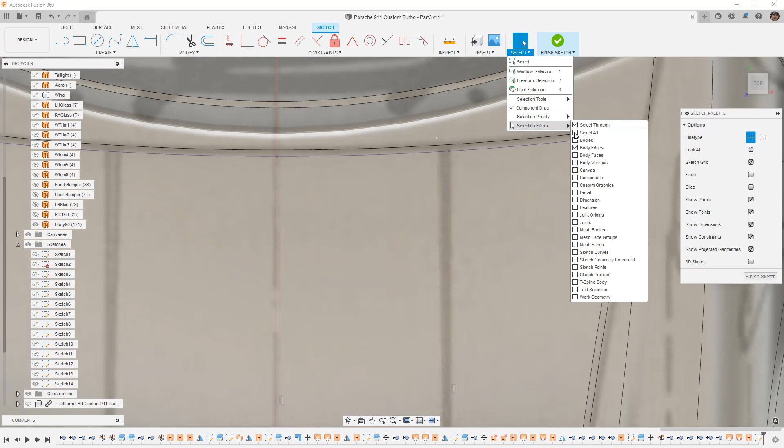So that triangle actually needs to extend past because I'm going to use it to split a face. And I'm going to come to here, and I'm going to come back up to that. Now, you'll notice that those ended up being construction. And again, it's based on the selection priority. I'm going to do select all, which will change my selection priority. I'm going to bring these back, make sure this one's construction.

And what we're going to do is we're going to use this extended line to split this surface down here because that's going to give me a reference edge to loft to. And then we're going to patch the rest of it together. All right, so what we're going to do is we need to mirror what we did here. So we're going to select mirror, take these two, go across our center line,

and actually, you know what? Let's go back into that sketch. There's one more thing that we need in this sketch to make this work. We are going to need a horizontal line because we have to break the hood up completely. We can't just create that triangle. So let's turn off our canvas and let's use trim.

So the trim tool is going to, we have to hold down Control, and we are going to trim away the center section. So we want to get rid of this little piece in here. And you'll notice it's not working. It's trying to trim the whole body. Again, if you find that this happens, you can use split body or split face. So let's try split body. We're going to split this body.

The splitting tool, again, is going to be this outside piece, and we're going to allow it to extend. We're going to say OK. And notice that it splits the entire thing. Now, we don't really want to split the entire car up. So if that happens, then we either need to do a better job of sealing this sketch off, or when we're using these tools, let's say split face, then we select an individual face to split.

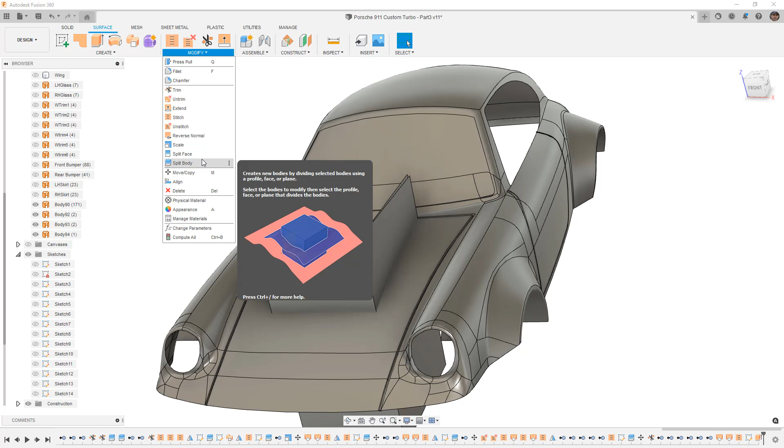So when we use a surface instead of a sketch, the extend option doesn't necessarily cut through the whole car, and that's the problem that we were having. So now that we have the surfaces, we can use split body or split face. Bodies to split will still be the car, but the splitting tool is going to be these outside pieces. Now, if we're still having trouble here, then we need to try split face.

Now, again, this is one of the problems that you'll sort of run into when you have a bunch of surface bodies connected together. You can see that it's still not working. So my last option here, or my last hope, is to either unstitch or go back before we stitch the body together, or to go back into the sketch and take this back edge and delete the projection and then trim it so that we actually have a closed profile sketch. So we'll finish the sketch.

And now if we use, let's say, just trim tool, we can use this closed profile as a trim tool, or we can use it as a split body tool, and it should work. So bodies to split, split tool. Again, we're going to hold down Control and finish off that entire profile. Make sure that we select all the pieces. You can see that it did trim away a little too much in the sketch. So that is problematic. That's probably the issue that we're having here.

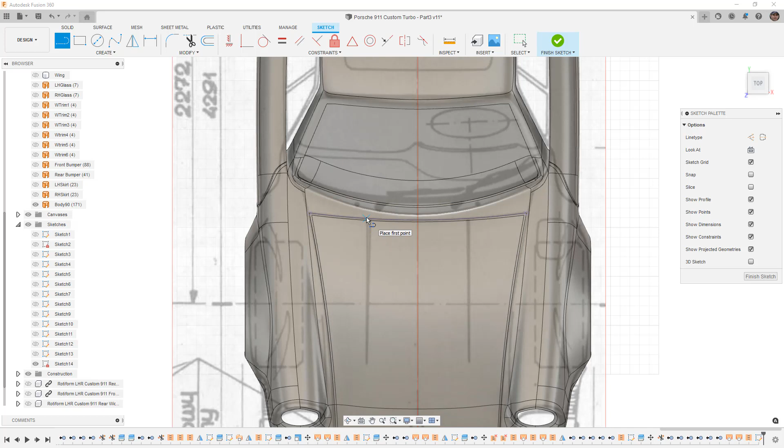I'm going to come over here and bring that back. I am going to draw a midline from the origin up here, make it construction, and I'm going to apply a symmetry. So for symmetry, we're going to select the two items that we want symmetric and then the mirror line. And that means that these two should now stay symmetric with each other. All right, so now those go well outside the face.

What we're going to do is we're going to extrude them up. I'm going to take this. And also note that it will let us grab that profile. Even though that upper edge extends, it will let us grab that entire thing. Let's hide the canvases. And this now gives us something clean that we can use to split it up. So unfortunately, sometimes that does happen when we're using projected references, and you might need to get a little creative.

But the good thing is we can now use this to split faces. So I only want to split the hood, and the splitting tool is going to be that extrude. And we don't need to extend it. So this extrude can go away. That can go away. And this face, it's part of the body, but I'm going to select it and I'm going to delete it. So we're going to go down to delete and completely get rid of it.

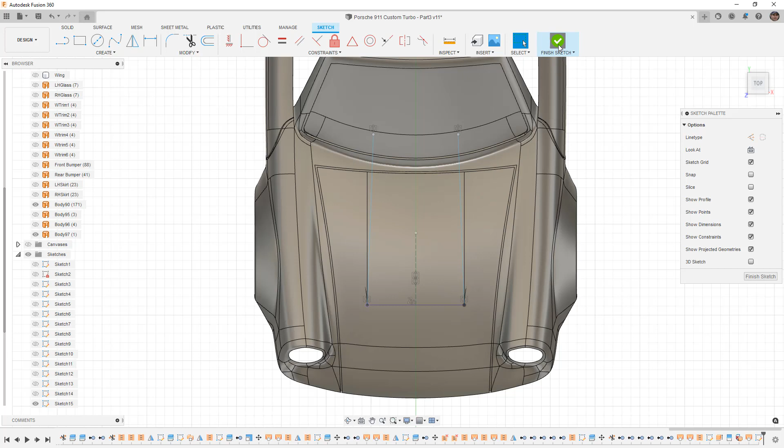I just need to extend past, and I need to mirror it to the other side. So that will go across our midline. And this section is going to create the blend between them. So we're going to use that sketch as a trim tool. We can hide the main body because all we really care about is the surface. So the trim tool is going to be this whole thing. So we're going to hold down Control, and then we want to get rid of these little wing pieces on the edge. Now if we bring the main body back, what we should see is we can now connect these pieces together.

So we're going to loft from this to this. I'm not going to worry about tangency. I can mirror that, but I can just go ahead and loft it on the other side as well. And then I'm going to stitch them together. So this piece, these two little pieces, and the rest of the car body, those will all go together.

You notice that there's a red line here, and that's because we didn't fill in that back section. Not really a problem. If you want to put more detail in there, like a little grille or a grate, you can. But that's going to give us the look that we want for the hood. Now, that took way more time than it should have, but that's partially because I stitched all the pieces together. I could have gone back before this stitch, before the hood was combined with everything else, and it would have been a little bit easier.

So at this stage, let's go ahead and save it. And let's bring back some of the body pieces, see what we don't need anymore. So these pieces we don't need. We're going to remove. We need the side skirts, front and rear bumper, all of the window trim, the left and right glass. I'm going to go ahead and bring all those back. So now what we've done is we've got the gap for the door. We have the side skirts, the bumper, we've got the rear bumper, and we've got the hood and the hood scoop.

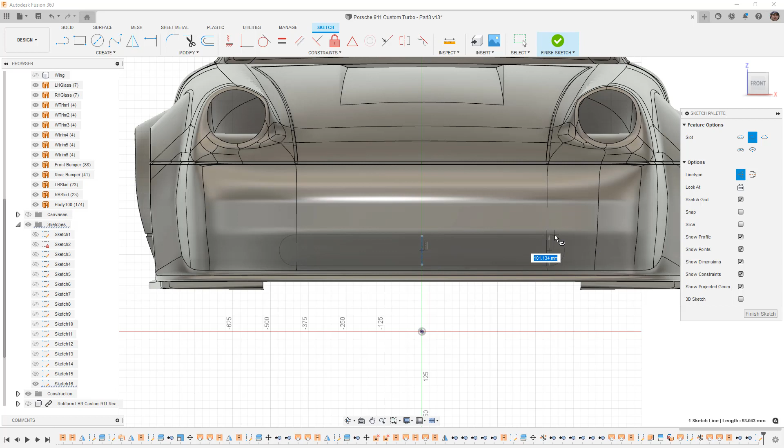And again, this line right here doesn't necessarily have to be there. Like if we're using the slot, we could go back and make the midpoint vertical with the origin. It just kind of depends. I do, however, want to divide this up a little bit more. So I want to keep a section in the middle. So I'm just going to make a vertical line at some point and mirror it. So select that. We have a mirror line, might as well use it. And this section over here will be open, and this section in the middle will be solid. So when we finish the sketch, what I'm going to do is I'm going to extrude that out, the entire outside.

I am going to come back to that sketch. I'm going to use it again, but for right now, what I want to do is I want to split body. So I'm going to split the bumper. I'm going to use that extrude we just created, and we're going to say OK. Then we're going to use trim. The trim tool is going to be that portion of the bumper. We're going to get rid of everything in front of it. And then we are going to move it back. But before we do that, we want to use our sketch to split that up. So I'm going to use split face. I'm going to split this face, and the tool that I want to use is that line.

I'm going to repeat the process on the other side and use that vertical line. Then we can hide our sketch. This is still just one face. So this front bumper piece is still one face. If we hide the bumper, you can see that we're left with that extrude there, and we should be left with this one right here. You can see that sort of there.

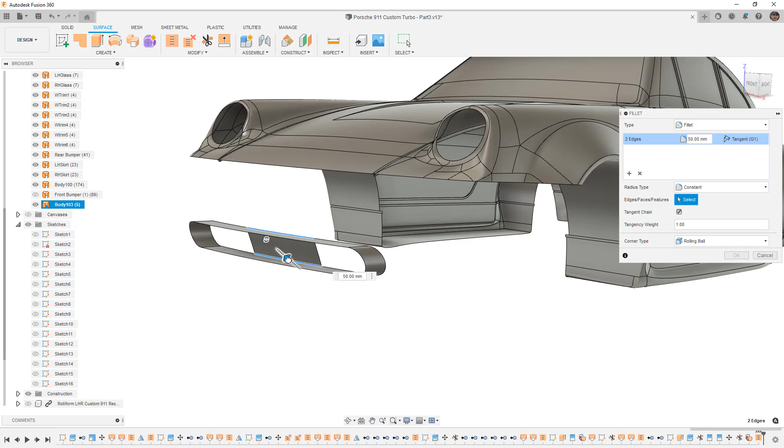What we can do is we can stitch these together. And we might be able to create a fillet on these edges. It's possible that it'll work. Sometimes it will, sometimes it won't. You can see that it won't. So if we want to blend these together, what we need to end up doing is actually cutting them with surfaces and blend them. Not really a big deal.

I think I'm just going to leave it like that, honestly, and then stitch this to the rest of the bumper. Now, if you have enough room, you should be able to create a fillet here. I would suggest that you do a small fillet, like 5 millimeters, and that we make sure that we have tangency. You could use curvature continuity, but that will help us blend that together.

And we could leave the back section and we could add the fillets and then delete them. There are tons of little things that we could do. But that's a good way to get at least the starting point of an opening. So let's repeat this for the section that's going to be an additional opening as well as the marker lights.

So we're going to create a sketch. I'm just going to do this on one side. I'm going to use a rectangle in this case. And I want this to be somewhere around here, and I want it to extend out to the bumper. And I'm going to create an arc. And this arc is going to have tangency here. So that means this vertical edge is construction. And I want to sort of keep it in those visual lines that we created.

That looks okay. And once again, I want to use this to sort of break things up. But instead of creating that extrude like we did last time, I'm going to create a split face. Now, the reason I'm using split face is because I can pick very specific faces that I want to cut, and then I can select this profile.

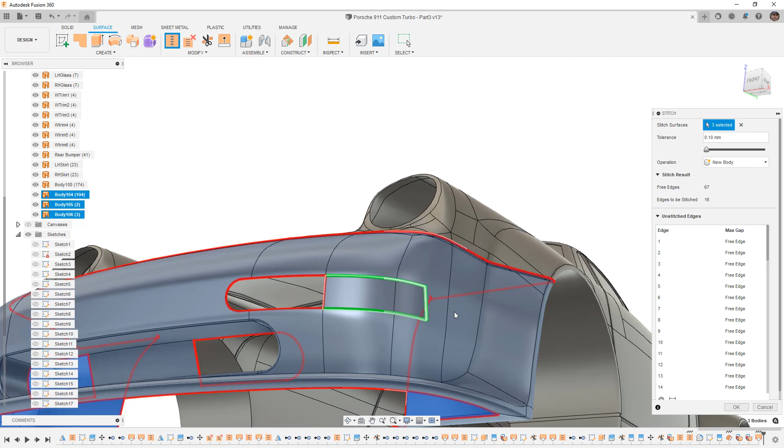So that looks pretty good so far. I'm going to stitch those together. I'm going to create a very small fillet in this corner because nothing is really going to have a square corner. So we want to round them off a little bit.

So 25, it's probably a bit much. I'm going to go to 15. And if we hide the edges, Control and 4, you can see that we've sort of got this recess. It's just going to be sort of a dummy or a fake for a marker light.

And the next thing that I'm going to do is I'm going to create the sort of intake scoop portion of it. So that last sketch that we created, I am actually going to use part of it. So we're going to create a new sketch. I could go back to the original, but I'm going to create a new one. And I want to take that and project it. So P on the keyboard and project some more of that.

And what I want to do is I'm going to create an arc in this area. So I'm just going to round that out. So we're going to go to our arc tool. And I'm going to select the top and the bottom, create a tangent arc.

And we need to be sort of mindful of this little section right here, because that's going to be problematic. So these being at the midpoint are going to be problematic. So I need to find that midpoint constraint and delete it. I want this arc to go a bit further, and the same thing down here. So if you find that happens, then you might want to manually place the arc at a different location and then add the tangency after the fact.

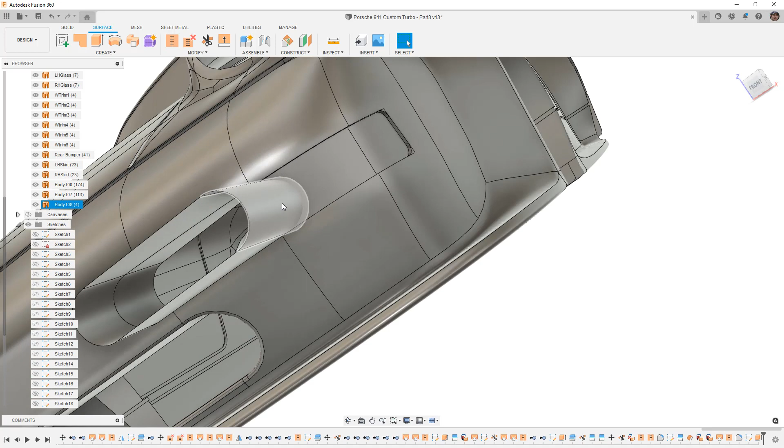So the reason that we did this is so, one, we can trim out this little section right here. So we can use that extrusion as our trim tool. And we can get rid of that little section there. And then we can use sort of the rest of the bumper to trim things out.

So if I choose the bumper as my trim tool, I should be able to get rid of the front portion of this. And even though it's not perfect, we can also patch the back of it and then stitch everything together. Now, when I say it's not perfect, it's because some of these edges don't line up right. You can see there's a red line right here, and that red line is telling me that we've got a gap. So you can see that there is a little bit of a gap there. But what we're going to do is we're going to use patch, and we're just going to fill that gap, and we'll stitch it together.

So that little piece and the rest of the bumper. Again, what we've done is made a fake marker light and this intake scoop. It's not completely open, but we can fake it with appearances.

Now that we have that, we need to mirror the bumper to the other side. Once we're happy with this shape, if we want to round out any corners and apply a small fillet, I'll say that applying fillets can be dangerous sometimes with surfaces like this, so make sure you save before you try. That way you don't end up losing anything.

So if I select these edges and go all the way around with a very small fillet, 1 millimeter, that'll break the edge. It won't be so hard.

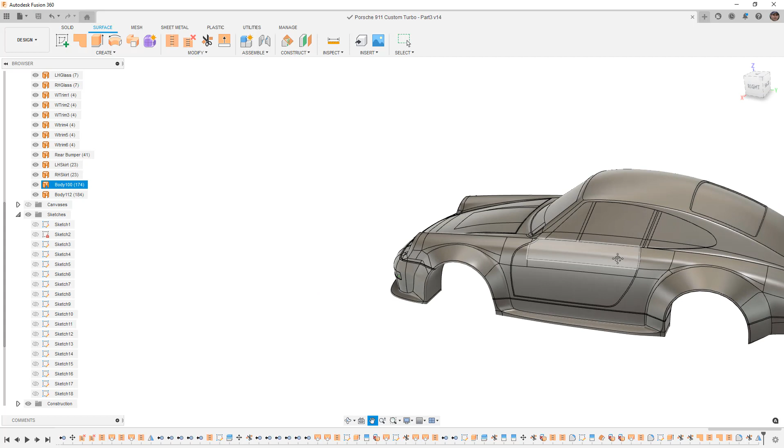Let's talk about the next steps. The next thing we have to open up is going to be the grille in the back. Another thing I did on one of the other models — I'll open it and we'll take a look — was I actually created the fender flares as these sort of extension pieces.

Now, it's hard to see in renders, but this is what the RWB cars actually look like. These pieces here, those bodies, are fender flares. I left the original fender flare underneath it, and I just made these extension pieces so it looked like they were stuck on.

Now, you can certainly do that. It may or may not really help the realism, but that's a little bit you can add to it. Honestly, I was hoping it would be more visible in the renders, and it's really not unless you get super close. But again, those are little details that we can add.

All I really did was use split lines. I split the fender up, created an offset — a 0mm offset — and then just thickened it into a solid body. At the end we can take a look at doing that. I don't know that it really added much to it, unfortunately, but we can look at it at the end. For now, let's go ahead and do this grill opening here for the motor.

Let's bring our canvas back and create a sketch. This was interesting because in reality these have louvers on them. The RWB cars tend to integrate that cover with the spoiler — they're all sort of one piece. That's not what we're going to do, but we are going to create something.

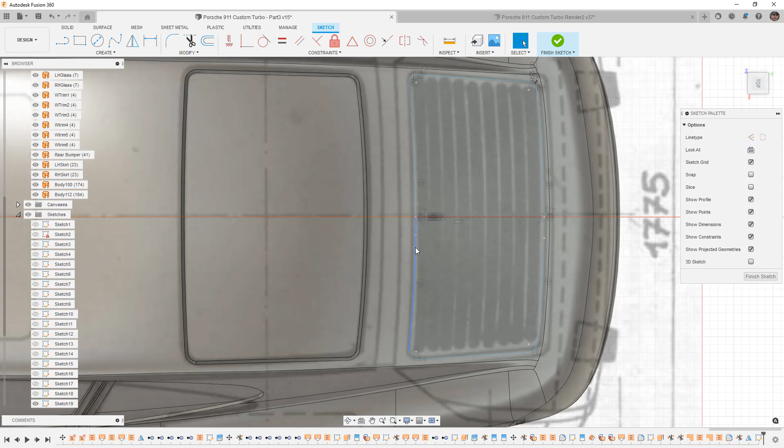Not really going to spend a ton of time, but what I do want to talk about is how we can make that happen. So the first thing I'm going to do is split that up. We're going to use that sketch. If you actually want to create this as an offset, we'd have to do it in the sketch.

So let's edit the sketch. Let's do offset of both sides. I'm going to bring it in 10mm.

Now we can use that to split the body. We can either do an extrude or a split—it kind of just depends on what you want. I'm going to do an extrude. We'll need to select that region, and again, we'll be trimming it out later. So let's go to the right view.

All right, before we go too much further, let's do a quick save. And then we'll talk about getting those louvers in there.

All right, so now that we have this extrude, let's go ahead and separate these bodies. This is going to be a little bit different than what we did with the window, but very similar to what we did with the door and the hood. So we need to create the recess.

The first thing I want to do is use split body. I'm going to split the car body, and I'm going to use the outside surface as the splitting tool. That should divide up everything.

Then I want to use trim because I want to trim the outside portion. So we're going to get rid of that upper outside portion. We could get rid of the inside too, but it's not really required right now because we're going to use this to split the hood or the cover for the engine.

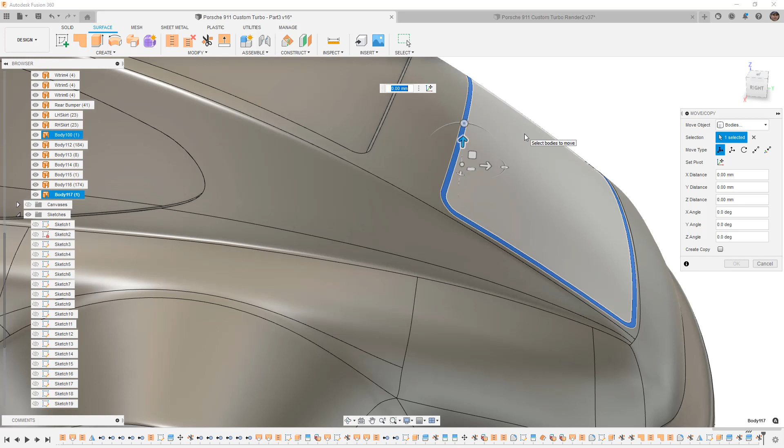We're going to have that go down a distance of, let's say 5 millimeters, just a very small recess. Now what we're left with, if we take the main body and hide it, we should be able to use the rest of these little pieces to trim the excess.

So what we want is this piece to come down, over, and back up to the rest of the body. The way we do this is we can use trim and just select our trim tools and the pieces we want to remove.

Now, I found that trim sometimes behaves a little interesting, and you have to be really careful with where and how you're selecting. So sometimes you might find that you need to rotate things a bit. Don't worry about this little segment here—that belongs to something else. You can see that belongs to this body right here.

Let's go ahead and hide it for now—I don't really know what that's left over from. But let's try trim again. And once again, we'll use this little inside piece, and again we're going to get rid of this outside section.

One thing you should always note when you're using trim: you see how it says 1 selected in the dialog box—that's going to be the goal. If it happens to jump up to, let's say 6 or 7, then it's trying to use all your selection as trim tools.

So now that we have all these pieces, I'm going to stitch them together, but I'm going to omit the rest of the car body for now. Because of the problems we had with the hood, I want to just focus on this section alone.

Now, if there's anything else—so we've got the main body here, this little sliver that was left over that happened to be trimmed by something, you can see. There's just a little section there that got trimmed. If you want to keep that, then make sure you stitch these two back together.

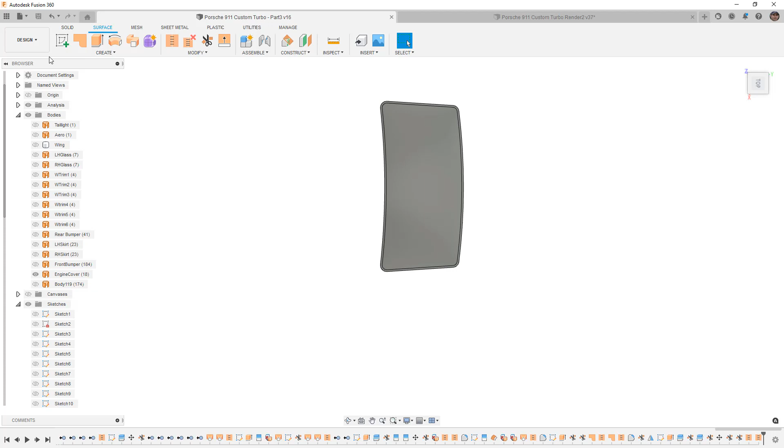So let's go ahead and hide some of this other stuff. I'm going to focus on the engine cover. I don't really need any of the trim or the glass. We're just going to focus our attention on this. So as always, quick save, make sure we don't lose anything. We're going to go to the top view, and we're going to start to create some of those openings, those recesses. So I don't really need to see the canvas for this. I do want to rotate it sideways.

But what we're going to do, if we show the canvas quickly, is just, these are a bunch of louvers, and we're going to essentially fake it. We're not going to create a real louvered hood because we're never going to do a render that's close enough to see that. If you are planning on it, then you would want to spend a bit more time making something a bit more realistic.

So the main thing that we want to do here is we want to make sure that we follow the curves that we use to create the start and the end. So the way that I'm going to do that is with project. So P on the keyboard, just select one of these edges. And then I want to take that, I'm first going to offset it. I'm just going to pick an amount, say 25 millimeters, and OK.

So this is going to get a little tricky because in Fusion 360, we don't have a pattern option that allows us to taper this down. So we're going to have to build this out manually, unfortunately. And the way that we're going to do this is we're going to use a linear pattern, a rectangular pattern. So we're going to pattern this object, and the direction is just going to be along the default Y. I'm just going to pull it out till it looks reasonable, and then I'm going to increase the number of instances. And what I'm looking to do is build out these louvers.

And so we're going to have this one connected here. There's going to be a gap, and then the next one connected, and so on. So the tricky part here is if we just do a pattern, then what we end up with is going to be things that are evenly spaced. We're going to have the same distance between each of these as we have to create them. And if that's the look you're going for, that's perfectly fine.

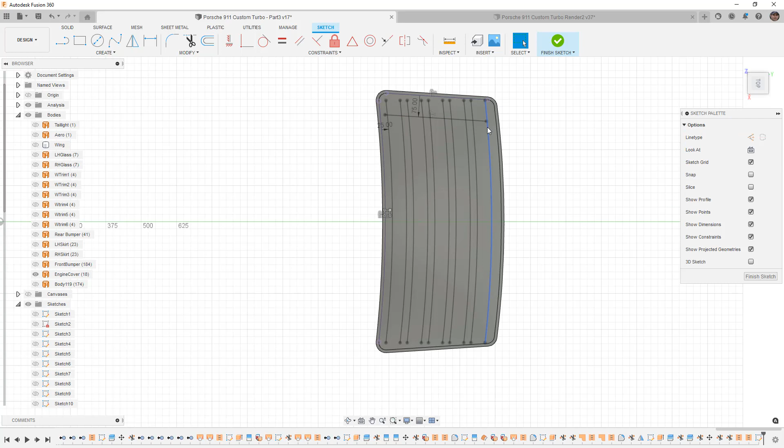And I'm only going to worry about one side. So right in the middle, I'm going to draw a line. You'll notice that I'm not having any snap points for midpoints, so I'm going to go from the origin and just create a whole line here. And then I can use trim to just get rid of everything on this side. Now, you'll notice that it's going to break the constraints.

When you create a linear pattern, that linear pattern is actually, so this isn't good. We've crashed Fusion. So this does tend to happen sometimes, which is why we save often. So we are going to send the report so that Fusion 360 knows exactly what's happening, and then we'll jump back in.

So here is the recovered document. So we can see that we still have the rear windshield, or the rear glass, I should say. But the last sketch that we were working on is not there. So we can go ahead and get started trying to make it again. But sometimes these things happen, which is why every time we make an adjustment or at least a big change, we want to make sure that we do save.

So once again, I'm going to use P to project. I'm going to use offset, and we'll bring this in 25 millimeters. And I'm going to offset it again. And you'll notice that it doesn't allow me to offset that one. You have to offset the original. This time I'm going to do 75 millimeters. And then I'm going to pattern those. So we're going to try this again, see if we can get it to work. I'm going to take these two instances, going to pattern it, let's say 5 times. And that should get us what we need.

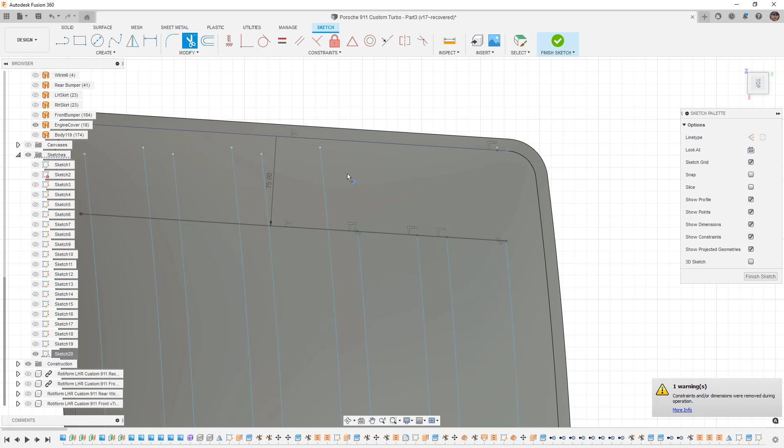So we'll trim this, we'll trim the outside pieces, and you'll find that when we're doing projections, offsets, or patterns, what actually ends up happening is a constraint is being created. Fusion 360 is trying to manage its relationships, and it's trying to figure out what is actually needed. So you can see that we got it to work. So I'm going to do a quick save in the middle of this sketch.

I am then going to take each of these, and I'm going to convert them to construction. So I'm hitting X on the keyboard. You can also do this in the sketch palette. I know we've done this quite a bit. You can select all of them if you want and do them all at once and convert them to construction.

So now the last bit we need is to create arcs. So these are going to be tangent arcs, and it's not going to be perfect because the tangency is not going to work with both sides. So if we try to apply a tangency here, you see how everything gets adjusted. So I'm going to do Control Z and undo.

The other option that we do have is to extend these out. So these were offset, but if we put them farther out, what we could actually do is create a fillet in these corners.

So there are other options that we have depending on how these were sketched. One thing that we could do is we could use a fit point spline. I'm going to do this with 3 points. And the only reason I'm using 3 points is so that I can initially get the tangency to go the direction I want easily. And then I can come back and delete that 3rd point. So that gets me that nice shape.

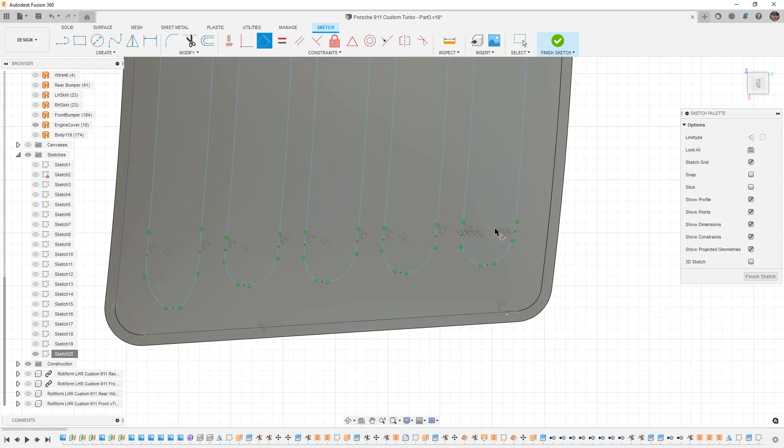And then once again, we're going to go spline to arc, and just work through. Now, it makes sense to do it this way rather than one at a time because the constraint tools will stay active and it just makes the process a bit easier. Then we hit escape and then just manually go through selecting each one and hitting delete on the keyboard.

Now, you will notice that these are different, and that was based on where I placed that point. If you really want them to be all identical, what you can do is you can control the size of each of these. I don't really think it's that critical for what we're doing because, again, this is just going to be a render. But what we're going to do is, in our surface tools, we're going to use split body. So bodies to split, again, is going to be this piece.

And I'm going to try to select all of these. It may or may not work. Sometimes it does, sometimes it doesn't. We're going to say OK. And in this case, it looks like it does not. It doesn't want to work. So let's try to do it one at a time. So this is the body we're going to split. And we'll try this first one.

That one works OK. So we can bring the sketch back, repeat split body, and we'll use this one. The right-click marking menu can be extremely powerful if you get used to it. Just holding down the right mouse button and dragging to that 12 o'clock position is going to repeat the last command. And then holding it down and dragging it to the 3 o'clock position is OK. So again, it sort of speeds it up. And this bottom one is a little tricky for some reason, but you can see that that works.

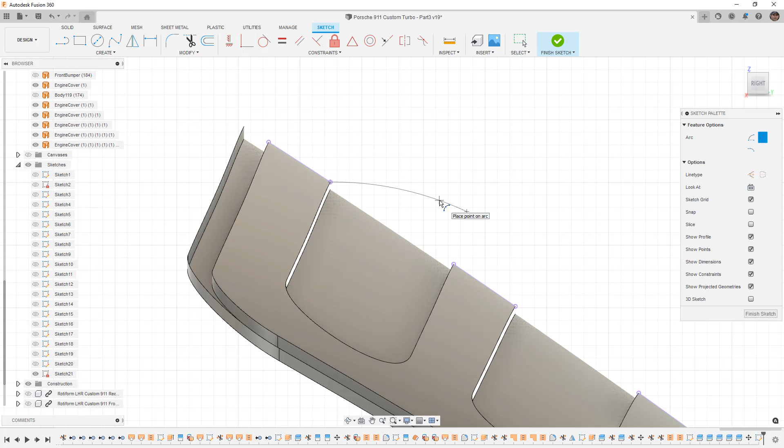So the way that I would go about sort of creating something like this is I would start with a sketch, and we're going to use sort of the midplane here. I would go to project include and intersect, and I would figure out where it intersects this surface. And then what I would do is I would create the louver shape that I want. So in this case, it would generally be something like a little bit of an arc. And then I would use that to create a sweep.

So if we're going to sweep this profile along a single path, you can see what it's doing is it's creating this weird sort of folded over shape. Now, the reason it's doing that is because it's going across the entire profile. If we turn off chain selection and only allow it to go across this edge, then we've got the starting point for the louver.

So that allows us to at least get the starting point down, and then what we need to do is we need to blend it into the rest. So one way that you can do this is you can try to loft from here to here. And in some cases, it will work out okay. In other cases, it won't. In this case, it gives us an okay result. It's not perfect, but it really is going to depend on how close you are for your renders.

So if you are going to be creating some sort of render that is really close, that might not be realistic enough. But if you want to just get something that looks a little bit more realistic from the side back here, then that could be a good result. Again, I'm not necessarily going to do this for these because I think it's a bit overkill, but that is one way that you can go about creating something that looks kind of similar. So for me, I'm going to go back and just delete those, and I'm going to use these louvers.

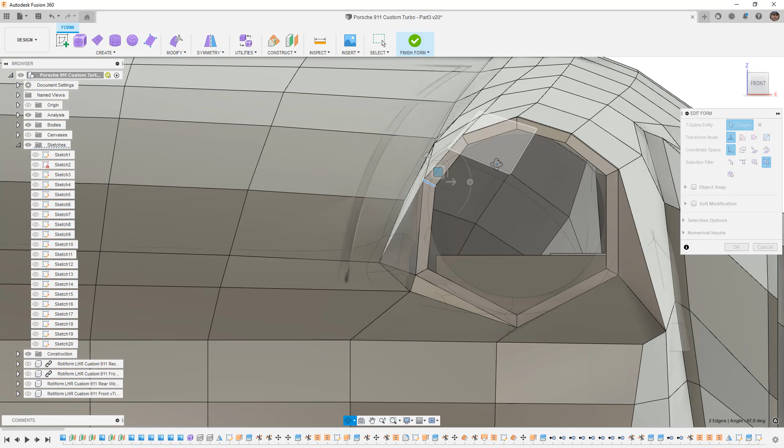It looks okay. I think I'm going to make some other minor tweaks, so probably to this edge here. And again, it can be kind of hard to select these. You might need to zoom in. If you're having a lot of trouble when you zoom in and things disappear, then one trick you can do is make sure that you go to orthographic, and then we can zoom in really close without having that same problem.

All right, so once again, let's go to smooth display and maybe just make some slight adjustments here. I'm not going to worry too much about it being perfectly circular, but we just want to fix that. So hopefully nothing else is affected by that change. The only thing that could possibly be affected is probably the hood. But since we didn't rely on any of the edges that were created in the conversion of the surface, then it really just has to go through and rebuild everything. And that looks a little bit better. It's a little bit closer.

But you can see that we do have an error with a loft somewhere. Sometimes when you get these errors, it really just needs you to go in, and you can see that it's an issue with the hood. And if we have to go through and find the hood, you can see that the hood is actually gone. So we're going to cancel. We're going to roll back to this spot in the history marker and figure out what happened.

So there's a trim here, and it looks like this loft is going the wrong direction. So let's make a quick change. For the first profile, it looks like the direction is flipped. Now, one of the problems that happens here is we no longer, so the rest of the hood is actually gone.

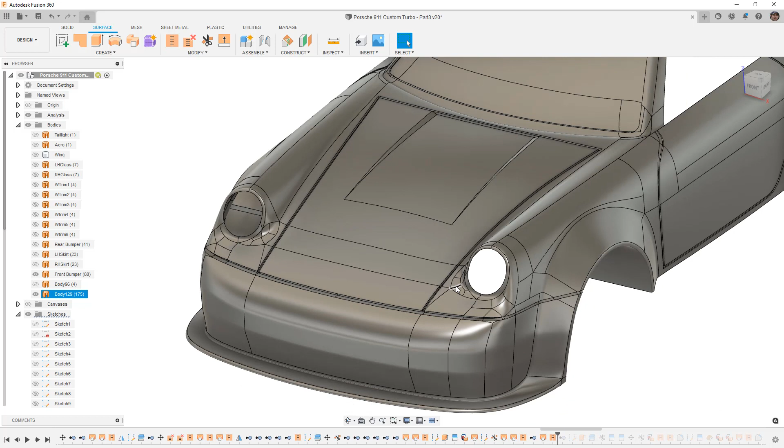So you can see, even though we didn't really adjust anything that we worked on, there were downstream problems that happened. And unfortunately, it does happen, which is why I say that we need to be really sure that we're happy with the body shape before we do anything. And you can see there are other problems that we're having here. So these are all things that you're going to run into if you go back and you decide to change something. So let's just work through them.

So this extrude is fine. The split body has an issue, probably lost its selection. So bodies to split is missing, so we need to select that. And then the trim should work okay. The split should work okay. That trim should work okay. The move and the other thing and so on.

Now, part of the reason that some of this happens is because the names that each of these bodies take on is relative to the selection process. When you're trimming, when you're splitting, when you're doing any of those different tactics, those selections are going to affect things. So if you happen to make just a slight change and the faces or the edges do make an adjustment, then sometimes that's enough to sort of flip it out. But it wasn't too bad. We were able to correct those problems. And let's go ahead and just bring back all the bodies, see what we have, make sure that everything's okay, and then we'll save our work.

All right, so everything looks good so far. You can see that we've got our door seam, our hood seam, we've got our hood scoop there, we've got the trim on the windows, we've got the seam for the side skirt and the rear bumper, we've got the rear hatch, we've got the opening for the tail lights, and everything looks like it did build properly. So again, let's go ahead and save this. I want to bring back the edges and then we can move on and figure out the next step.

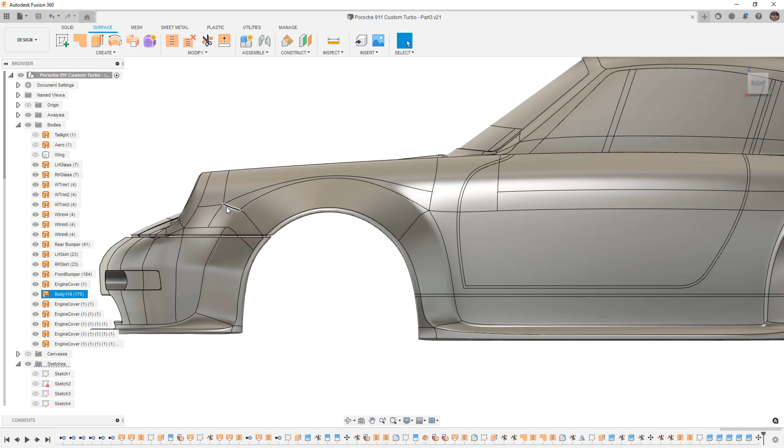For simplicity's sake, I am not going to go through and create the offset fender like I showed you in the other version of this, simply because it just isn't visible in the renders. So it doesn't really add any value. If it was really visible, if you want to put hardware in there and make it a different color, let's say carbon fiber, then by all means you can do that. And maybe at the very end I can show that, but I don't think it's worth our time.

What I do want to talk about, however, is I want to create a headlight. We need to create side view mirrors, and we also need to address the wing and the taillights and the aero. So these are all other pieces that we need to talk about. So we have been working in the back and we're working in the front, we just fixed a few things.

Let's go ahead and take care of the headlights now. For the headlights, I'm going to create a new sketch. Doesn't matter, just pick any old plane.

But for this one, what I want to do is create a 3D sketch. So I need to select 3D sketch in the sketch palette, then go to Create, Project Include, and Include 3D Geometry. For Include 3D Geometry, I want to bring the 2 points at the top and the bottom of the headlight. The reason those are important is because this is going to help us define a lens that we're going to put on the front of this.

I'm not going to go through the process of creating chrome headlight trim and all the different little trim pieces on the car, because when I modify things in reality, I tend to get rid of all that stuff anyway. If you're making a custom car, at least something like this, you're not going to be putting things like chrome trim back on it. Maybe you are, maybe you aren't, I don't know.

But for me personally, I'm not. So what I'm going to do is create an arc. And this gets a little tricky in a 3D sketch, so we need to be mindful of the plane that is active right now. You can see that we're looking at the right plane, which is the YZ plane, and I am going to try to snap to these points.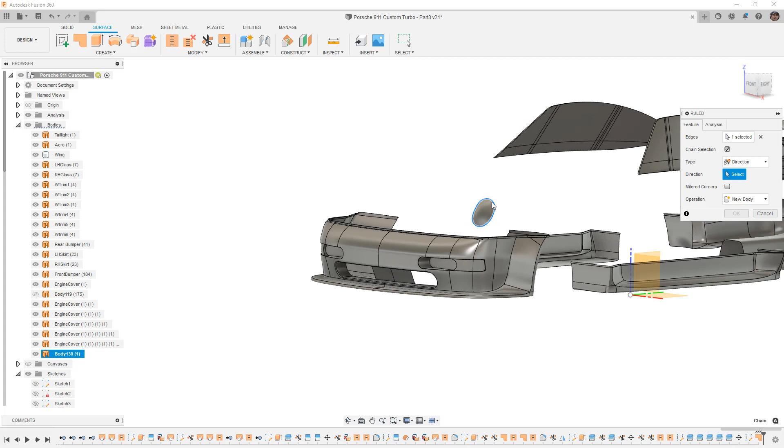Now, what I want to do at this point is hide the body and work with just this. So now that I have this lens, what I'm going to do is create a ruled surface. We're going to change the type to direction, and select this edge as the start. And the direction we want to go is back to the XZ plane.

The reason we want to do this is we're going to build a sort of headlight bucket. We want to add some taper to that. So with the taper, let's try, let's say, 20 degrees. You can see that it's tapering outward, so we're going to say minus 20 degrees and allow it to taper inward. This is going to start to fill in a section of the headlight.

Once we have that, I'm going to patch the back of it, and now we have this sort of closed headlight area. Now, again, the curvature on the front of it is not great. We could work with that more if we wanted to, but this is just going to be the general process. I want to stitch the back and the tapered side together, but I'm going to leave the front disconnected for now. This front piece is going to be the glass.

I'm just going to call it glass. I'm going to hide that for now because the next thing I want to do is build something that will actually emit light.

The process here really depends on what you're designing. We could sketch something out. For example, if we sketch on the front plane, we could draw a circle. Let's pick roughly the center of the headlight. Remember that the headlight itself is this outside edge, right? I'm going to give these a dimension between them so they don't overlap. I'll just say 8 millimeters. And then I'm going to start to move them around.

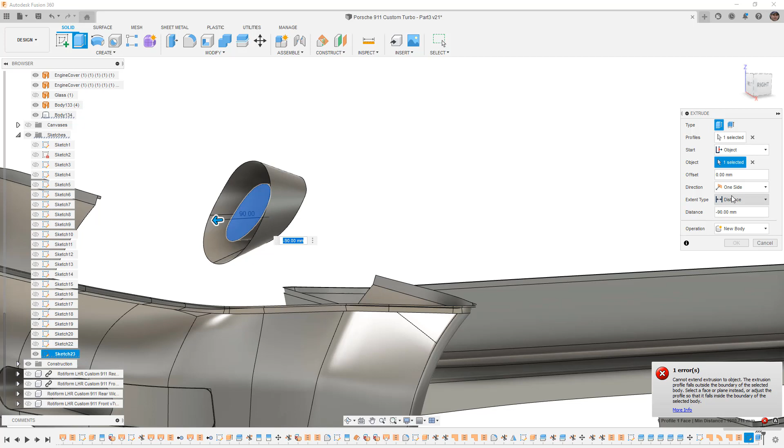So let's try offset. Let's look at our coordinate system. Let's go 2000, see where that puts us. It looks like it might be going the wrong direction. Yeah, so negative 2000 — it's all based on the XYZ coordinate system. So negative 2000 puts us there. Then we can come back and use those surfaces to trim things.

Depending on where you want it to go and how far, we can either use the lens, that glass lens, to trim it, or we can just set it back a little bit. What I'm going to do is use the glass lens to trim it. I'll add another 10 millimeters, maybe 15, just so it goes all the way through. It looks pretty good.

Now we can split body — the body to split will be the solid, and the splitting tool is going to be the surface body. Then we'll repeat that process: the body to split is this, and the splitting tool is now that front lens. Then we just look for the bodies we don't want. This is the one we want to keep, this one we want to get rid of, and that one too. So right click and remove.

If we hide the glass, we now have this sort of halo effect, this piece here, and this piece here. When we get to doing appearances, we'll talk more about actually applying those light appearances.

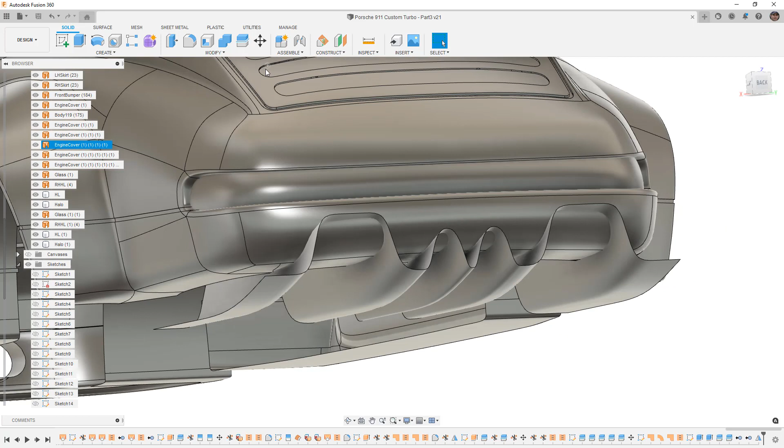With the Aero pieces, we really just made this kind of custom shape. I didn't have a good idea of what I wanted the Aero to be. But what we can do at this point is use our surface tools, let's say trim. So if the trim tool is our bumper, we can get rid of everything outside of that bumper. Now if we rotate this around, you can see it cut away most of that other stuff and only left these little pieces here.

So if we do Control Z and undo, let's use split body instead. With split body, the body to split is going to be our bumper, and our splitting tool is going to be this Aero piece. We'll say OK. Now if we hide the Aero piece for right now, you can see it split the bumper into a bunch of other pieces. The bumper we want to keep is this piece, and all these little pieces we want to get rid of, so that's these 3. We'll right click and remove, and then the original rear bumper, things get renamed, and now we've got these little pieces here.

We want to bring back our Aero, and now we can use either split body or trim. In this case, if I do trim, select this, and try to trim, you can see it's not working because of how they intersect here. So let's try split body instead. Bodies to split will be this, our splitting tool will be this, allow it to extend. And you can see it didn't work.

So if this doesn't work, what we can end up doing is manually build out these Aero features. We can leave the entire Aero piece in here, or trim it up to a position that makes sense. So I want to take the Aero and the rear bumper, right click and isolate those two, so I'm only working on that. So we can see here where the Aero is going, and we have to figure out how we want to connect the two.

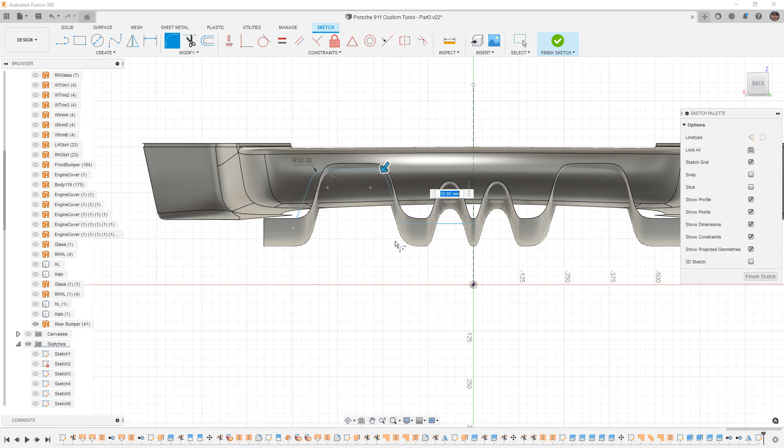Before I do any mirrors, I'm going to go ahead and add some fillets there. I'll add one here as well. And this piece right here, I'm probably going to add another line to. So the line is going to come over, and I'm just going to take it back up into the bumper, and then add some fillets to here as well. So select these two, add some fillets, and that looks okay.

So now that we have this piece, I'll just mirror all of this to the other side. If these constraints are ever in your way, you can always turn off the show constraints, and that'll clean things up a little bit. You want to make sure it's on whenever you are actually trying to fully dimension and constrain something, but with what we're doing here, sometimes it's just kind of in the way.

All right, so now we have this shape. I'm going to offset it. I'm going to take the entire thing and just maybe offset it, let's go ahead and say 10 millimeters, we'll put it up 10. And then I'm going to use my line tool to connect it to make it a complete closed profile.

At this point, I can hide the original Aero. I don't need to see it, and decide if I want to do any more. So I think that's okay.

The next thing I want to do is extrude that out. So let's go ahead and just take this entire profile. I am going to offset it. Let's go ahead and go 1500 millimeters, see where that puts us. And maybe bring it back a little bit. Let's do 1000 and 1250. And then we'll pull this all the way out through the bumper.

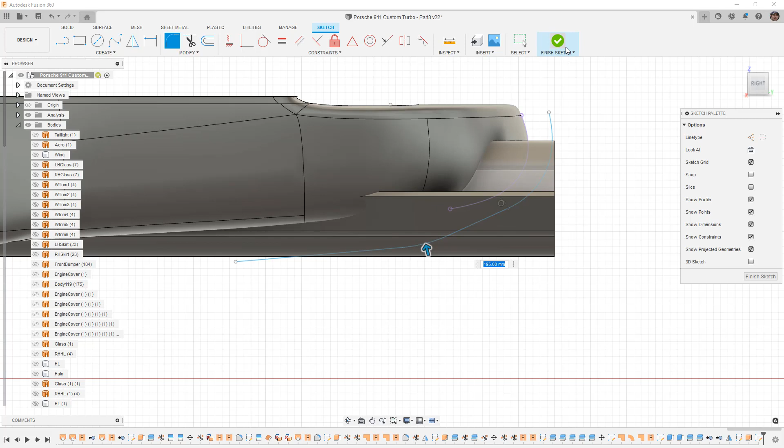Before we get out of this, I'm just going to add a fillet so it's nice and smooth, and then finish. So we can use this sketch to trim, so that'll be our trim tool, and we'll just get rid of everything that's on this side of it. All right, so now we have some Aero features that stick out, and we want to get rid of the space that's left in the bumper. So we're going to end up patching the opening, the end of this. We're just going to let it create a patch there. And that'll sort of fill in the outside area.

It's not perfect, but another way that we can do this is we can take that original sketch, and instead of trimming, if we get rid of that trim, we bring back this sketch, we can just use this as an extrude. And then I'm going to go ahead and use symmetric. And then instead of just trimming it with the sketch, we can trim it with the surface. So this is our trim tool. This is what we want to remove. Let's go ahead and rotate this so we can see it better. Trim tool, remove that. Repeat the process.

This time, this is our trim tool, and we want to remove everything outside of it. And then we can just stitch those two together. So that'll be a little bit cleaner than the other version. Now we can use trim or split body. It kind of just depends on, again, your geometry. If we try to maybe trim out these inside sections. So get rid of that and get rid of that. And now you can see we sort of built in some Aero.

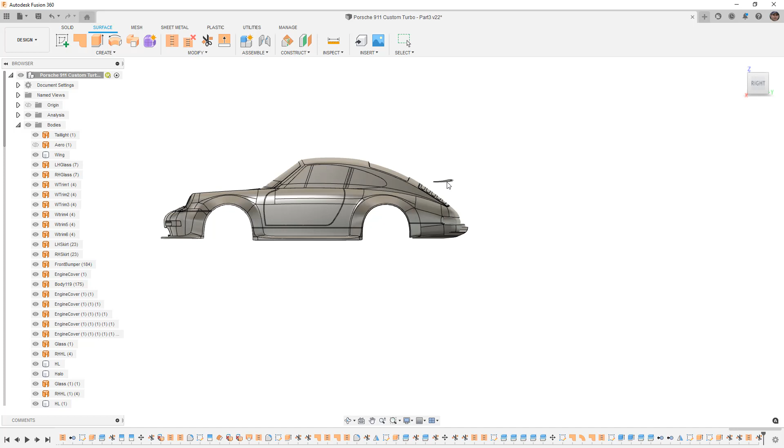And now we can sort of approach the wing. So the wing is very unique, and in this case, we don't have a flat section. We don't have a flat that we can use to create a sketch. So what we're going to do is create an offset plane, and we want to put that plane at a position that makes sense.

So I am going to use the plane in roughly the location where the end of our engine cover is. And we can vertically see about where that is. And I'm going to say okay. And then what we're going to do is we're going to sketch on it. So when we create a sketch, we're going to use project, include, and intersect. This time I'm going to say intersects with bodies. I'm going to select that body. And this is going to put a curve exactly where it intersects with the wing.

And from here, I can begin to build out the wing support. So what I'm going to do is just bring the wing support down far enough that it definitely goes into the body and bring it back and up to the wing. And then we can build out whatever shape we want inside of here. So if we want some parallels and maybe some triangles, we can do that. Just find out where things are parallel and then build in some shapes and some supports. So that little line there can go, bring that one in here. And it doesn't look great, but that will give us what we need just for our renders.

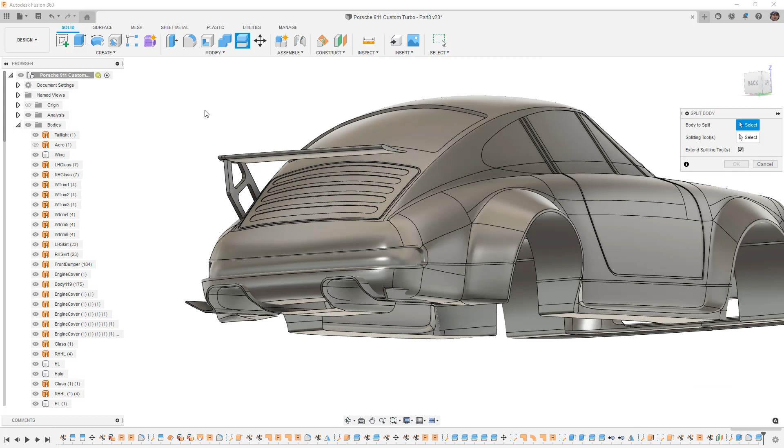And I'm going to repeat that process, and the body will be the wing, and the split tool is going to be the mid plane. So I want to split that wing right in half. So we're going to go ahead and select the YZ plane. And then the wing piece that I want to keep is going to be this little section here. So I'm going to find the wing that I don't want and get rid of that. And then if we want to build out any additional end caps or anything else, we certainly can. But what I'm going to do is just mirror that.

So we're going to create a mirror, select bodies. I'm going to take this piece and the piece of the wing, mirror them across that, join them together, and now we've built out a little wing. You can see that there's an error with the mirror, and that's because there are multiple solid bodies. If we just set it to new body, it should be fine. And then we can use combine to join the two pieces of the wing together.

And there you go. Now, typically what you would have is extra little plates or something on the side. Again, this is an area where you can really spend a lot of time customizing things. So you have to decide what's going to work best for you. Now, after I look at this, I can tell that extra little piece on the outside, I wanted to keep. So I think that looks a bit better. And then we can put something on the end.

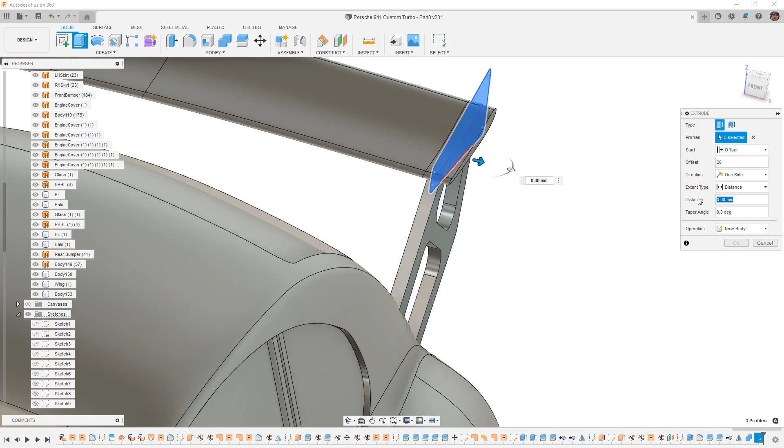So I'm going to take all the profiles and I want to extend it out. So we're going to offset it. And let's just go ahead and give it 20 millimeters. And then we'll extrude that maybe 5 millimeters. We'll select join. And that sort of builds out our little end cap.

So then we just have to mirror it to the other side. This time, instead of mirroring a body, we're going to mirror a feature. We're still going to mirror it across the same plane and just allow it to build it. So you can spend as little or as much time as you want on that.

I'm not going to worry about the interface between the car. You could use the car body to split this so that it matches exactly. You could do a split face here and create a thicken so that you have a bracket. In general, what would happen is the body would get cut and this would go down to a chassis member, probably inside the engine compartment or right here where you could just cut out a small piece of the body.

So I think in reality, that's probably an okay solution. These are probably a little thicker than they need to be, but again, you can spend as little or as much time on these details as you want. I do want to make sure I go back to perspective with ortho and make sure that everything is looking okay. Do a quick save.

And let's go ahead and let's build out a simple mirror. So again, with the mirrors, you could spend a lot of time, but what I'm going to do is go to create form. And I'm going to start with just a box. I'm going to do this on the front plane. I don't need symmetry, so I'm just going to draw a box up here about where it needs to be. I'm going to move it into place and go to the side and move it into place.

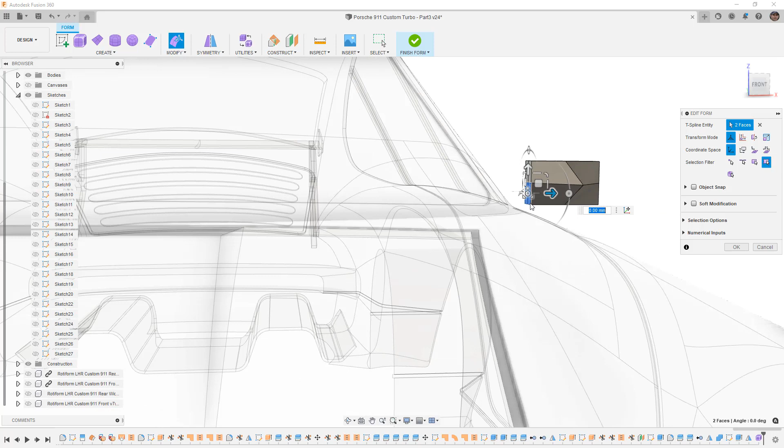Go to the front view, and the attachment to the car can be done in here, or you can do it after. It kind of depends on the shape you want to go for. So what we could do is we could select all of these side faces. I can rotate this down and select the bottom ones as well. And then we can extrude them out. So again, holding down Alt, sort of bring them down and into the car.

Take a look at it in smooth display. And obviously that doesn't look great. So the way that we go about fixing this is we start to control it with inserting edges. So if I double click down here and I insert an edge and pull it up close, when we look at this in smooth display, you can see that we've got some edges, but they don't go all the way. So you can see the edges aren't on the other side.

So we're going to go to Modify and Insert Edge. And once again, we're going to pull it up relatively close. And then we want to use Insert Point. Double click the mouse wheel to bring it back in view. And what I want to do is I want to take it from this edge to wherever that edge ended up.

And we want to do the same thing on the bottom. Go to Insert Point, find out where we put those edges. And now if we take a look at this in smooth display, it should start to look a little bit more controlled and refined. Let's go back to a front view. Go back to box display, and if we grab all these edges, we can begin to scale them down.

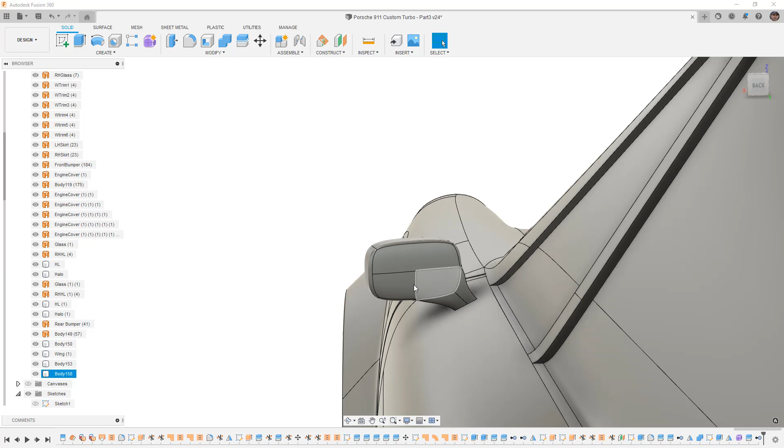We can use the actual body to trim it. So if we use split body, bodies to split, the splitting tool is that door. And now what we've done is we've got this body and then we've got the little piece on the inside. So we can use remove. And to add some more detail, we could extrude on that face and remove some material. I'm not going to actually do that, but if you want, you can create a sketch and you can just create an offset in here and actually build out some glass.

But what I'm going to do is I'm just going to mirror that to the other side. So mirror bodies, and we'll push that to the other side. And I'm going to call this left hand mirror, and we'll just call this one right hand mirror. All right, so the next thing, let's go ahead and let's bring all of our wheels back and just see what this thing looks like. So save it before we lose anything. And so far everything looks pretty good.

I think that we still need to trim the tail light. So I'm going to go to Trim, and I want to get rid of the outside of the tail light. And we're going to repeat that using the bottom bumper as the trim tool. And if there's a bottom piece of that tail light inside the car, it's kind of tricky. It looks okay. So everything looks okay.

We've got this taillight piece, and all we're going to do is we're just going to apply a red color to it. I'm not going to worry too much about the inner details of the taillight, but everything looks pretty good. We got some Aero features. We've got the body seams and the divisions. We've got the glass. We've got the headlights. We've got the bumper. We didn't fill the bottom in or the back of the wheel arches or anything like that.

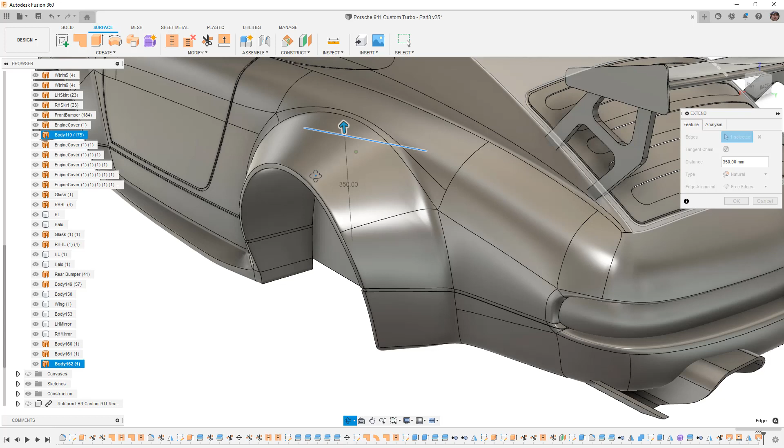You can also trim it, and you can spend the time to sort of stitch things together, but the bumper, the side skirt, and the body are all different. So just having a blank panel in there can sort of work for you. So we can go ahead and put one on the other side, and you can do the same thing in the back. So we'll just do a quick loft. We'll go from back to front, and we'll just extend this edge up. And again, as long as it doesn't cut through the body anywhere, you don't really have to worry too much about trimming it, but just sort of blocking it off.

And then the other thing that you might want to do is just block off the bottom of the car. So we loft from side skirt to side skirt, for example. Maybe create a blank panel for the back of the grille or the opening, and we can sort of fill in some of this stuff. So if we go loft from, let's say, here to here, if we stitch that and the rest of the bumper together, then you can just use patch to fill in this opening.

And again, we can just sort of loft from here to here. And some small gaps are not really going to be a big deal, but just getting the major gaps, the big gaps filled in will really help, because then you're not going to see daylight through any of the body panels. So it looks pretty good so far. If we hide the edges, everything looks pretty good.

And again, the devil's in the details, right? If you spend a lot of time building out a spoiler or building out your aero package or building out some custom wheels, that's really going to set it apart. I don't have brake rotors behind the wheels. We could, again, fake it by just putting some surfaces back there. But again, it really just depends on how much time you want to spend. I do want to do a quick save.

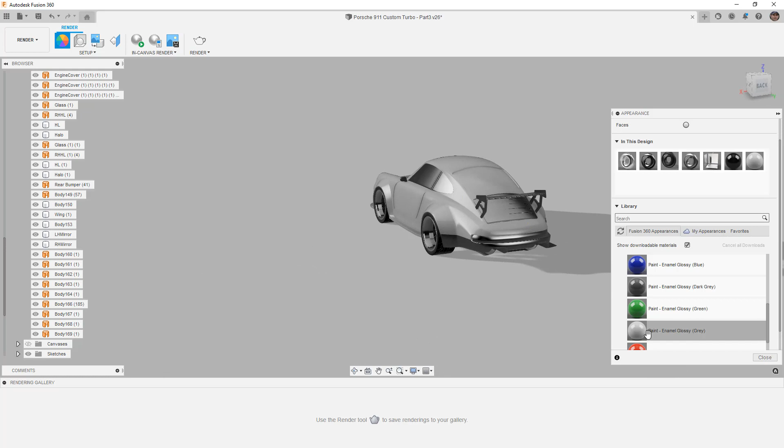But really quick, I'm just going to hit A on the keyboard to open up my appearances, and I'm going to go into glossy paint and just apply a white paint to the body, a white paint to the bumper, a white paint to the side skirts, and let's go ahead and do a white paint on the rear bumper as well. And that at least gives us a good idea as to what the car looks like. And then I'll do one on the trunk.

And again, if you want to fake things, because these are individual bodies, we can make each of these black. Right now they're glossy, but they could be any color, and that kind of helps us with the deception. If you are going to spend some time applying appearances, just remember that you can use the faces option. So for example, if we go to glass and we find a glass that we want to use, let's say that we have a tinted glass. Let's do gray. I can drag and drop it onto an individual face.

So that's what you're going to have to do for the windscreen and for the rear glass. Just go ahead and drag and drop it onto anywhere that the glass should be. And then for the sides, it's going to be a little bit different, because it's sort of its own body, but you can still do the individual faces if you want. Let's go ahead and rotate this around. For some reason, the pivot point was way in the middle. So again, you can do the same thing and just drag and drop it on those faces.

These pieces are going to end up having to be black, and if you want to do that you can box select a bunch of things in the browser, then we can just drag and drop it and it'll apply it to all of them at once, kind of speed up the process a little bit. So again, this is not going to be a rendering video. We're going to talk about that in a future video. We'll deal with the headlights and all of that stuff as well.